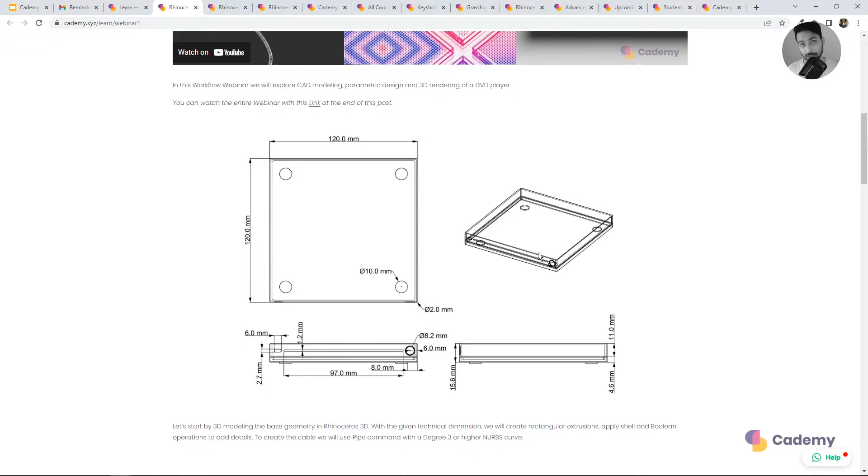You must have seen the posts, that's why you guys are here basically. If you are not aware, we have already done a couple of webinars in the past, so you can go to the resource section. This was the first webinar, so if someone is barely starting with Rhino, you might find this one more useful to start with. The second webinar was a bit more complex geometry. This was the third webinar, for a VR headset. And now we are on the fourth webinar.

The webinars have the common theme of creating a workflow. So you start by modeling your geometry in Rhino, then you will apply textures in Grasshopper, and finally we will export it so that we can render in Keyshot. You can, of course, download the free version of all of these softwares from their respective web pages.

All right, so how will the workflow look like? We will start by 3D modeling the mouse in Rhino. You will also notice that I have prepared the file in such a way that you can follow along the steps, and you will also understand how you can create such a complex shape from complete scratch.

Also keep in mind that it might be a bit more difficult to follow along, so try to skip steps, because I have prepared files or shapes in that particular section that you can try and copy to learn that specific command. So we will start by creating the curves, then we will move to surfaces, then we will add details with the Boolean operation, and finally we will prepare the mouse for texturing in Grasshopper.

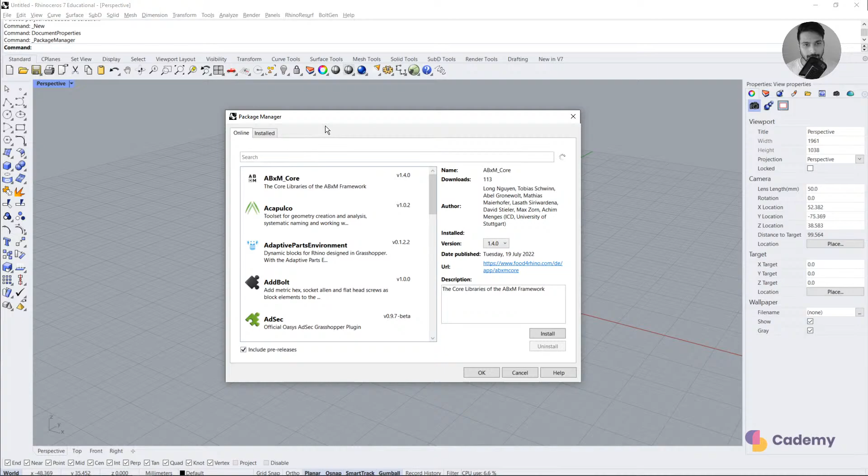In the 4 viewports, the first thing that we will do before we open the file is that we will turn on the package manager. You go to the command bar and write package manager. If it's in Spanish or another language, you can always write underscore and then the command in English, it will work that way as well. Basically the package manager is a new way to install plugins in Rhino and Grasshopper.

In our case, we will be downloading the Lunchbox plugin. So you can look for Lunchbox and you can find that plugin here, just press install and there you go. So you don't have to go to the Food for Rhino page, download the zip file, copy it in the components folder, etc. Not all plugins are here yet, but most common plugins you will find here, so just try to download it through package manager.

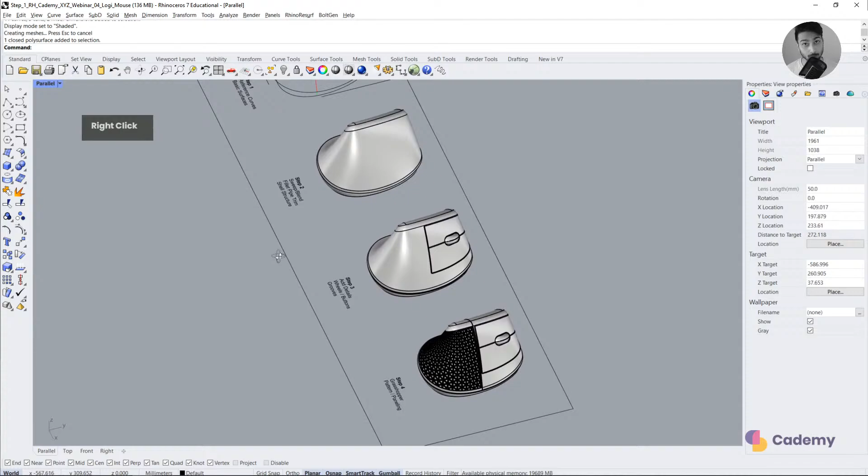First things first, let's change the viewport to shaded. You might notice it's taking a bit longer because I have cleared the mesh cache so it doesn't weigh a lot when downloading the file. So now you can see the first step is creating the curves and basic surfaces. Second step is creating the top part of the mouse. The third is adding details with Boolean operation, and finally texture with Grasshopper.

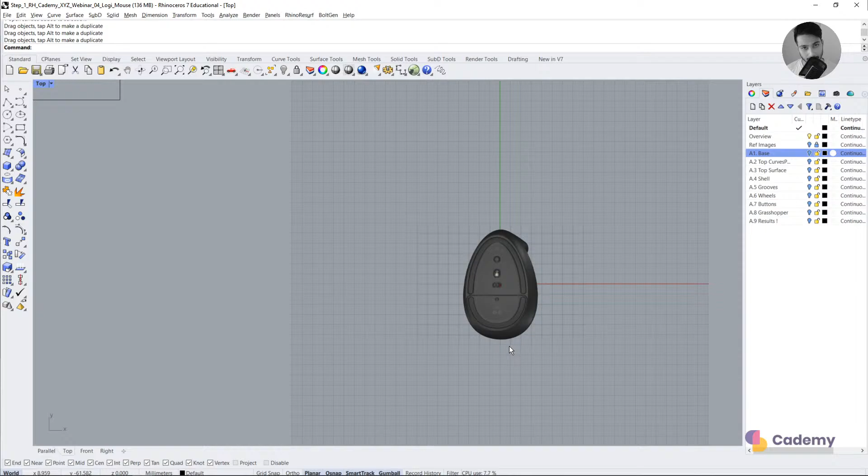It should measure, I think, 108 millimeters. Now you can see the image length of the mouse from top to bottom is 108 millimeters. You would put it in the center, and do the same thing with the rest of the images. Finally, you can also reduce the opacity of the image so you can draw on top of it and still see the curves. You can change it under property object, materials, and change the transparency.

Well, for the webinar, I have already prepared the images. So when you turn on the reference image layer, you can see that I have put all the different viewports that you can use to create the mouse.

So let's start with the first step, the base step. You will notice that you have two parts of the workflow. The top part is the part which I have already finished, and the bottom part is where I would encourage you to follow along the steps that we are seeing. So let's get started.

I'm going to go to the top view, and the first step is basically drawing the outline of the mouse. You can draw the organic shape that you see here using a curve through control points, and the degree of the curve is a degree 3 curve so that we can create a smooth curve. A degree 2 curve is not so smooth, and basically a degree 1 curve is like a polyline.

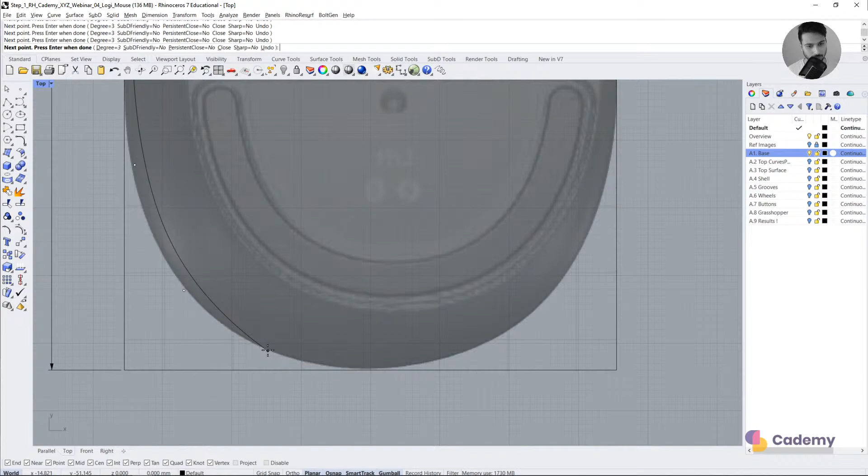So we are going to use a degree 3 curve for this shape. Let's turn it on, set the degree to 3, and then you just copy the shape, the outermost shape. You don't have to be too precise at the moment, because once you draw the points, we can always come back and recalibrate the outline.

So there you go. You can just move these control points manually. When you select the curve and you don't see the control points, you have to turn it on over here, turn on the control point of the object, and then you can move it left and right accordingly.

So once you have drawn the outline of the mouse, I have left it here prepared. The next step is going to be creating the internal curve. For the internal curve, you just use the same curve, basically Control C, Control V, and you scale it.

So you scale it by using the gumball. If you don't see this tool that shows the arrow, you have to turn it on at the bottom of your Rhino viewport, the gumball. So I'm gonna scale it in this axis as well as this axis. Just try to make it as close as possible to this outline. You can see just by scaling it in the two directions, we are able to copy that shape.

So once we have the two curves, now it's time to draw the cut that we have to apply on this shape. Let's go to the front viewport around here, and I'm going to draw this diagonal cut. Let's turn on the curve through control points and try to mimic the shape of this cut.

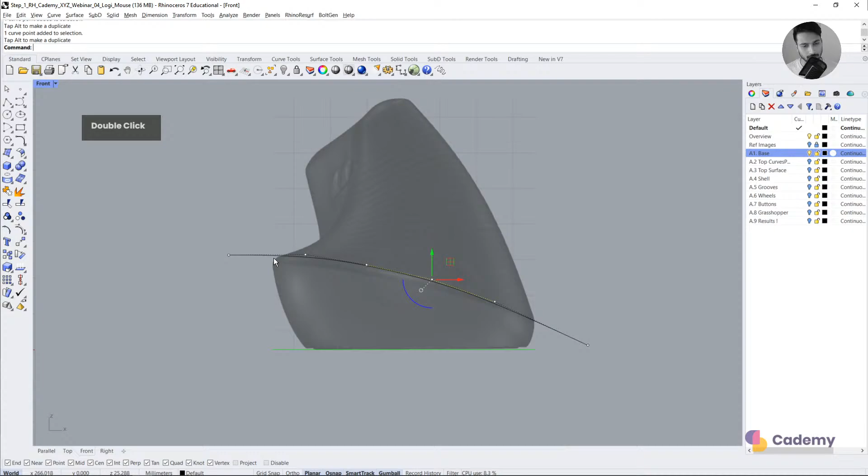You can of course turn on the control point. You can move this control point in order to calibrate properly the shape. So once you have done that, the next step is going to be creating this curve that will define the lateral profile. So in order to do that, once you have created this curve, let's just move it a bit behind, we have to extrude it.

So you can use this curve and you have to extrude it. In order to extrude a curve, you can of course first run the command, which is surface extrude curve straight, and you just extrude it beyond the base curves so that we can project it later on. Or you can also use just the gumball, and using the green handle, when you drag it from the green handle, you are extruding that geometry.

And finally, we don't want this surface that we have extruded to have this much control point, as well as we also want to dip the surface in the front part.

So I will be changing the properties of the surface, and you do that by rebuilding the surface. You select the surface, you run the command rebuild. I have given you the properties to rebuild the surface, so you're gonna rebuild it using degree 3 in U direction. The red arrow is the U direction, and degree 2 in the V direction, which is the green arrow. So you will have 4 control points in this direction, 3 on the other. So you set it to 4 and 3.

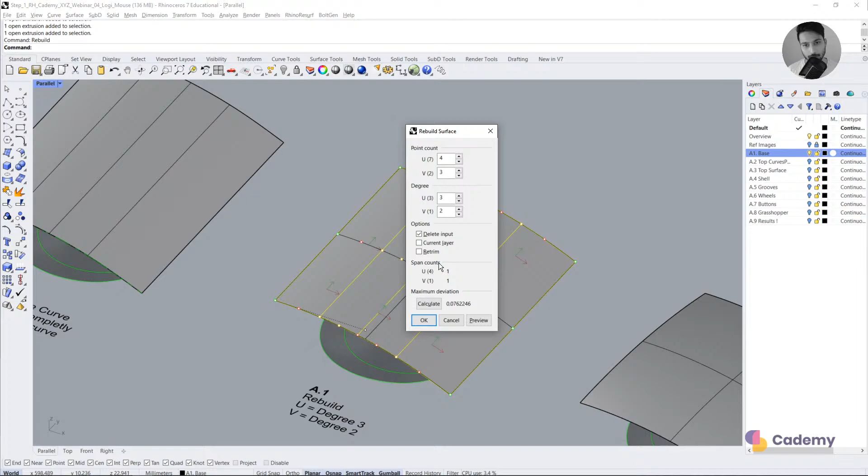These are a bit more complex topics. If you're starting with NURBS modeling, it's basically the smoothness of surface, or the degree complexity of the surface in the two directions. And you have to just add one more point than the degree to have a single span surface, which is like a really smooth surface. But don't worry about it at the moment. Just try to copy this part, the parameters, and press OK.

So you can see now that we have slightly changed the property of the surface. And what we will do is basically move this part down by 15 units.

Okay, -15, and this part by -1. That's what I mentioned here, because if you look at the reference image, that's how much the part dips in the front. If you compare this back part to the front part, we have to move it around 15 units down.

Lastly, we have to project this curve on this surface. So let's run the project command, project curve to the surface, and you should see the curve projected on this curved surface.

Okay, let's see if someone has any question. Can you please explain rebuild a bit more, when to use it, etc.? How can I turn the units next to the mouse on?

Rebuild is basically that once you have created a geometry, you can change its degree and number of control points when you rebuild it. Generally you would use it when you have a really complex shape and you want to smooth it out or simplify it, or when you have a specific dimension curve but have to create a single surface out of it. You would rebuild it with a lot of control points so that you can create a single surface from those many control points, and then apply some texturing techniques to it.

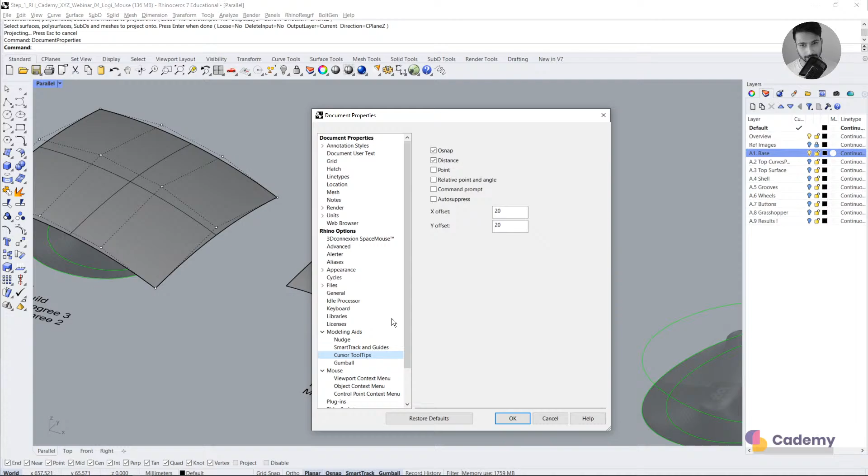How can I turn on the units next to the mouse? You can do that by going to document properties, then mouse... no sorry, modeling aids. It's under modeling aids, cursor tooltip, and turn on the distance option.

Okay, so let me repeat the project command, project the curve to the surface. That's how you will get it. Make sure that the project direction is up, so that it projects up, not front or back.

Finally, once you have the projected curve, that's one use of rebuild. You can see the curve is really complex, so whenever I create a surface from that curve, it will also be that complex. So what I can do is rebuild it using fewer control points, let's say maybe 11 control points. Now this geometry is a lot simpler and smoother compared to the previous surface.

Finally, if you look from the front view, you can see that the control points are either up or down because this was a curved surface. So what we can also do is make sure all the points are aligned in the same plane. You can run the align command and make it fit the average plane. Under modification, align to fit plane - there you go.

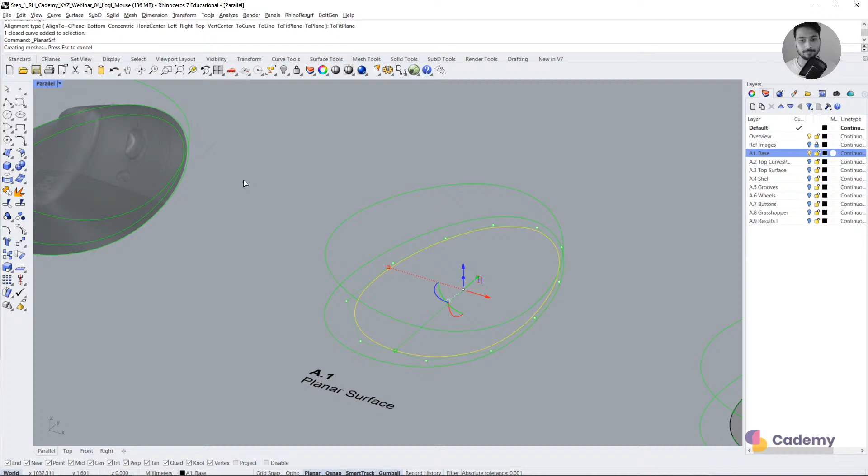Then we're going to extrude this curve upwards so that we can blend these two parts. One last thing we will do before performing the blend - let me show you what will happen if we just blend it right away. It is working, but we need to add some additional profiles to align the cross section.

So let me first generate the profiles and then perform the blend operation. To create the profiles, go to the top view for that geometry and run the bounding box command. It's going to draw a rectangle around that curve, and you can find the intersection and draw a line - here you find the intersection, draw the line for the 4 parts.

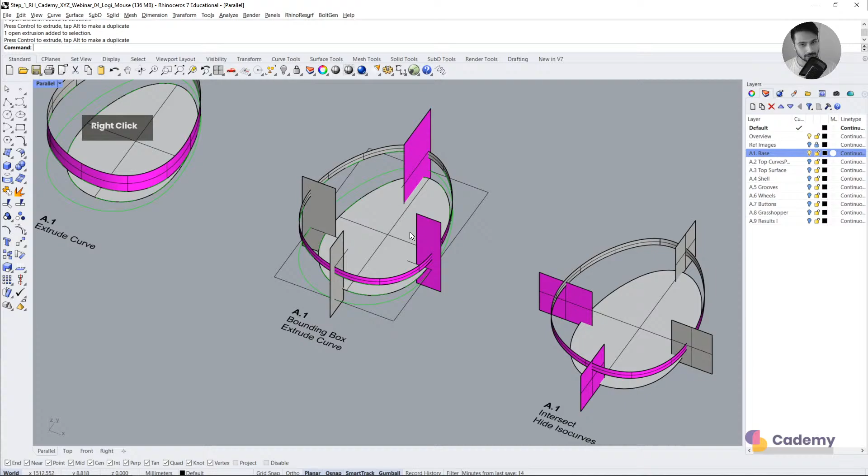Once you have drawn the line, you would extrude it up, making sure that it intersects with all the shapes, like that. You can also move it a bit behind, forward, or outwards in either direction. What we're trying to achieve here is to intersect this with the shape so that we get the specific place where we have to create the cross-sectional profile. So you can come here where I have already prepared it.

Just run the intersect command. Select the geometries that you would like to intersect, and you will notice that it has created these intersection curves, which we can take advantage of when we are performing the blend operation.

We also don't need to see these ISO curves. A lot of you probably model in SolidWorks or Fusion, so these programs have their ISO curves hidden by default. You can do that in Rhino too: select the objects, go to object properties, and hide the ISO curves. Now you don't see those additional curves within the surface.

Finally, let's perform the blend between these two edges. Run the blend surface command, where you will blend this edge with this other edge. We need to align first the seam where the surface will close on itself, so I'm going to use this cross section. Let's press OK.

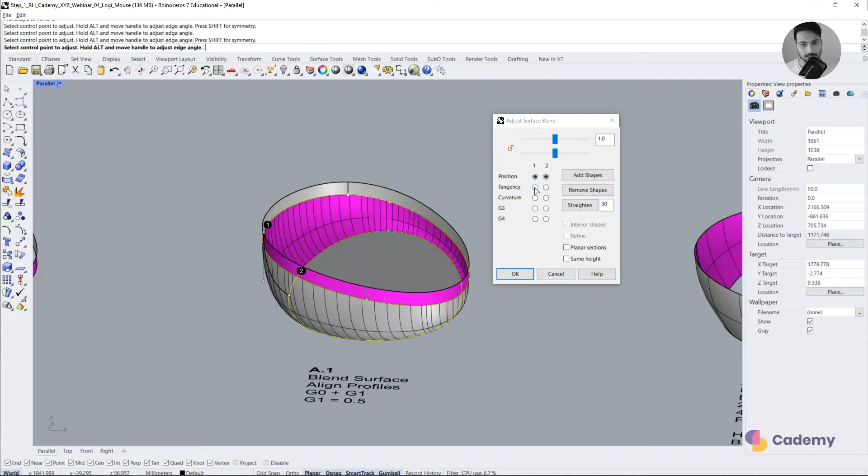This command asks you to define different continuity criteria, as well as control the extension of that continuity. If you set this to 1, it's basically like a simple loft. If you set it to tangency, you can see it's following tangency on this part, and continuous, positionally continuous, or G0 continuous on the other end. So it's G0, G1, G2, G3, G4 - these are different continuity criteria.

You can choose which edge has which of these continuity criteria. In this case, we need G0 for 2. We don't need any kind of continuity except positional for the bottom part, and for the top part we are good with G1. The only thing I'll change here is the extension - it's going to be 0.5. You can define it like that.

Finally, you will add shapes, because you can see these internal ISO curves are not aligned to our profiles. Let me add new shapes - again, you can do that by drawing a line going from here till there. You can see it helped align the cross-sectional profile. Same goes for this part to that part, and finally from this part to that part.

And there you have the bottom surface. You can always hide the ISO curves if you want. Finally, you can also rebuild it using less number of control points to simplify the surface.

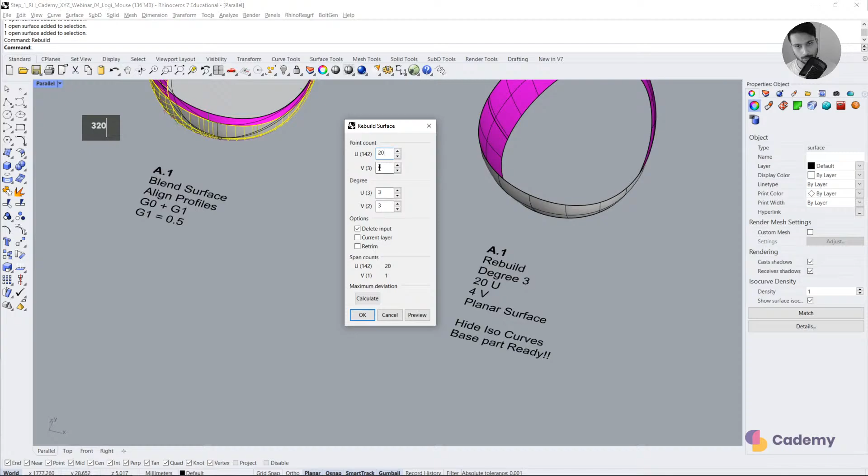So I have given you the criteria to rebuild it here: degree 3, rebuilt using 20 control points in U and 4 control points in V. You can see this is now a simpler surface compared to the previous one. This was previous, this is after the rebuild. You will always try to work with simpler surfaces.

So that's basically the first shape. Any question?

What's the difference between just blend and then the intersect step? If you just do normal blend, both commands will work exactly the same, but if you have created the intersection, you will add additional shapes that can help align the ISO curves. If you don't do the intersection, you don't have that reference so you can align it properly. That is why we had to align first the intersection and then perform the blend.

So let's go to the next step. I'm going to try to go a bit faster now. The next step is basically creating the top part - the top part of the mouse is made like this.

You create a curve, pipe it around 10 units of radius, and then intersect it with a plane. If you intersect this, you get that curve for the top part. That's basically what we have to do.

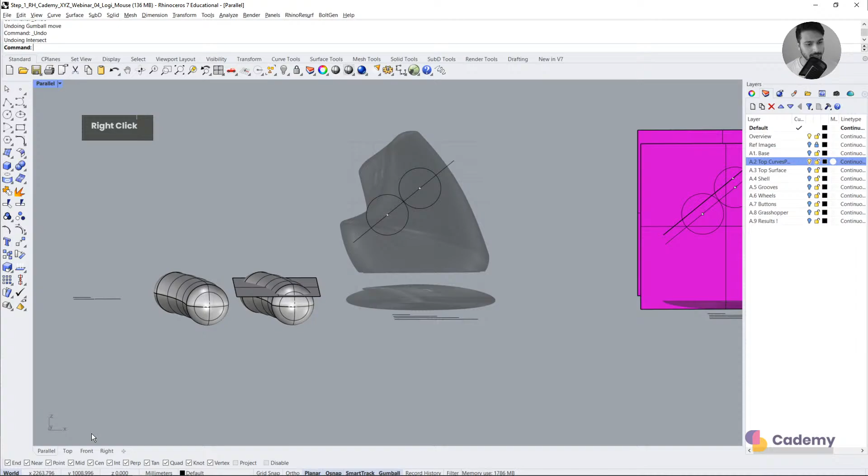In this case, you can see that I have basically drawn two curves approximating the front and the back part, thinking of it as a cross section of the pipe. So the radius is 10 units, and I have connected the centers of these two shapes, or these two circles. You can try to do it on your own - you can create a circle with a radius of 10 units.

Once you do that, you will project these geometries to these two planes. Why? Because if you look from the top view, you can see that is where the cross section or the circular part of the pipe starts on both sides. So I can just extend it, and then I will project these shapes from the front view to these two planes.

Like that. Finally, you can create a loft between these two curves and connect a line between point 1 and point 2. This is going to help you define the angle in which you have to draw the pipe.

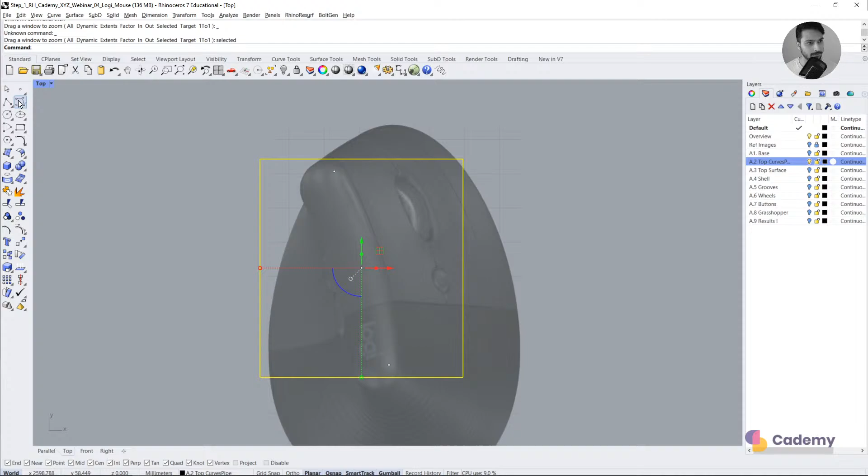So the next step is basically going to the top view and trying to follow the shape. Let's try to follow the shape more or less like this. I think it's better to draw it on the floor, like that. You can extend it later on.

And finally, you will project the curve on the shape. Keep in mind that when you're calibrating something, you can project it with this option called record history. So this is like a really small parametric option that you have in Rhino.

And lastly, you would create a copy of that plane and move it up by 7.5 units. I've done the calculations earlier, so that's why you're just moving it in that way. Finally, you'll pipe the curve. Make sure that when you pipe it, the cap is set to round, so the starting and end of the pipe has a round cap.

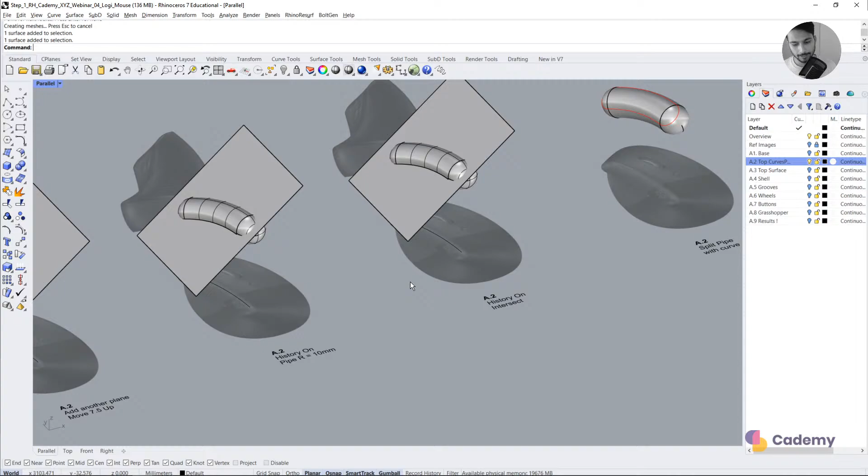When you rebuild the surface, how do you ensure that it doesn't break continuity with other surfaces? You cannot. You have to match it again. So you cannot guarantee it. Of course, you can add a lot of control points, more than the neighboring surface — that way you assure it. But apart from that, you have to match it one more time.

And lastly, we are going to intersect this tube and the plane to get that profile. That's basically the profile we have here. Finally, you can split the tube with this profile, get rid of the bottom part, and there you go. So we have modeled the top part of the mouse.

Now the next step is creating the profiles for the surface generation. The easiest way is extending this plane so it intersects with the bottom part, and you can do that by finding the radius. There's this option called mark radius, so let's click that, and you can see it creates this circle.

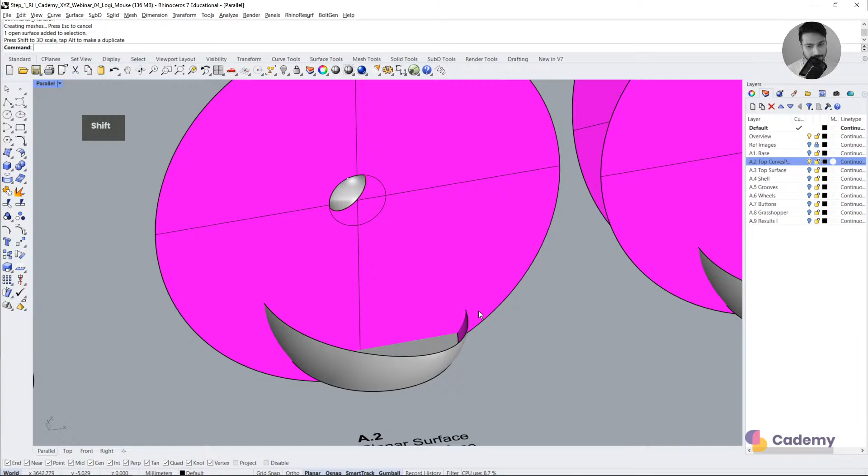That circle is a planar circle, and you can convert it into a surface. With the shift key, you can extend it as much as needed so it intersects with the base surface. In that way we can create a curve that is on this plane, making it a lot easier to create the surface later. I'll do that for the front and back part, and finally intersect them — intersect this and this. You can see we have these intersection curves.

Lastly we have to create the profile. You can do it two ways. One is using the blend option — let me go to the shaded view. You run the blend curve, not blend surface, where you blend this green curve to that curve, and you define the continuity criteria. In 1 we want position, and in 2 we want tangency, and you can drag this down to match the curvature of the surface. That's one way.

Another way is to draw a line between this point and that point — it's a bit easier in perspective mode — and rebuild it using 4 control points in this case, then move these points to match the outline of the mouse. So these are the two different ways to generate the curves.

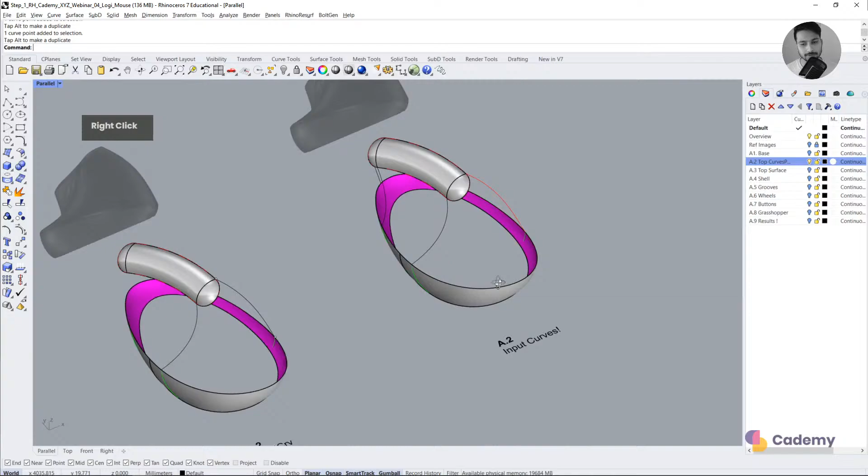Once you have these curves, we can now generate the surface. Let's turn on this next layer and go to this part.

How do you know you break the continuity with rebuild? Let me show you, since some of you have the same question. When you rebuild a surface, you cannot guarantee that it's going to maintain the continuity. For example here, if I rebuild it with, say, 16 control points, you can see that I've broken the history or continuity between these two objects. So you cannot guarantee it. What you will do instead is recreate the boundary — make a planar surface, and I'll recreate it. You cannot ensure that it's going to be continuous.

Another thing that you can do is try to match surface, matching this edge with this edge. You can define whether you want to match it with position, continuity, tangency, or curvature. You can also refine the match so that it matches perfectly within the tolerance of your file. So those are only two options.

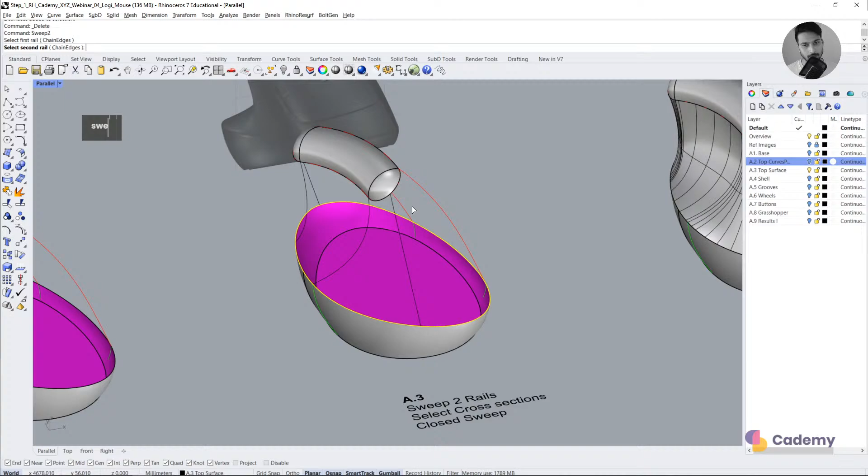Anyways, let's continue. So for this part, let's generate this surface using sweep 2 rails. Rail 1 is our edge at the bottom, Rail 2 is the red curve, and then you can select the cross-sectional profiles.

Basically you can see we are generating the surface. Make sure that you turn on the closed sweep option so that it closes the sweep, and press OK. That's how you will generate the surface.

You can go to rendered viewport if you want to see it under HDRI. And you can also hide the ISO curve if you want.

So the next step is going to be rebuilding the surface. Again, we are going to rebuild it. It's going to go away from the original edge, so I will show you how you can resolve that problem.

But the reason for rebuilding it is, see this surface, it's really complicated. It's not smooth. Also, if you run commands like analysis surface curvature analysis, you can see there are so many artifacts on this surface. So what you will do is rebuild it.

With as few number of control points as possible without losing the shape of the surface. In this case, you can change the degree to 5 to have an even smoother surface, and change this one to 36. Okay, so that is basically here.

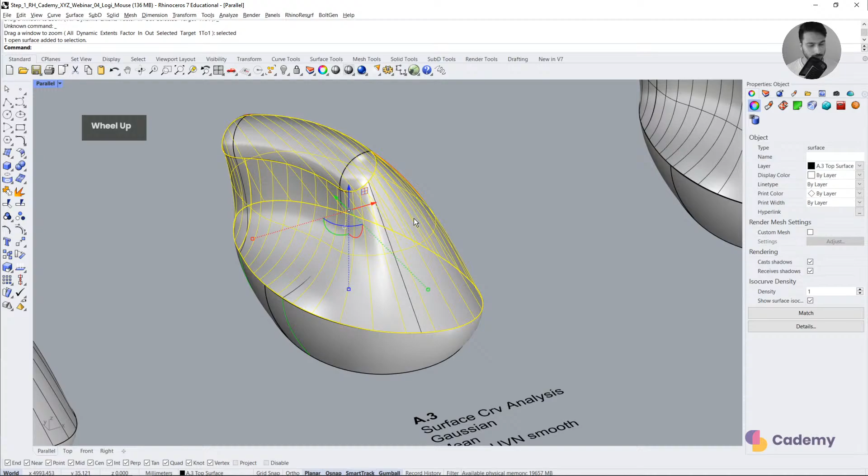And lastly, you can also analyze the surface. Generally the Gaussian analysis is basically showing when the surface either folds inwards or outwards.

You can resolve that by turning on the control points, and you can manually move these points to kind of relax the surface, but you're moving the points in the coordinate of Rhino. However, there is a special tool called Move UVN, which can help you move a point on the UV or normal direction.

You can also smooth it out by the smoothing option. You can select the point and you can smooth out that point. So this can slowly help you create a simpler and cleaner surface.

All right, you can do that for the other parts, and finally you will end up with something that looks like this. And of course, the edges don't match. I cannot just magically join them because when I rebuild it, the edges are not coincident anymore.

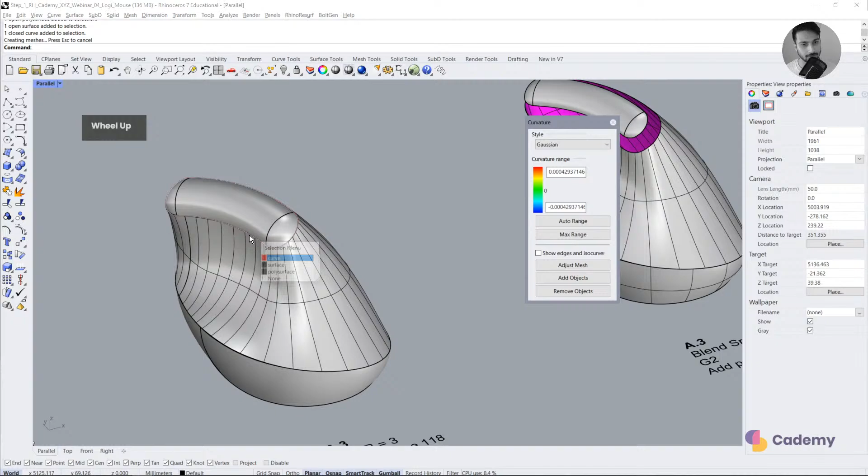So what you do when you have to join these two parts together, well, you create a buffer area between these two parts. And you can do that by basically taking the curve. Okay, here you can see how I have done it.

You basically take the curve and you rebuild it, like every time, with a lot of control points. And then you pipe it. So the surface that it generates is a lot smoother.

So you can see I have already created the curve here. You can pipe it, or you can first pipe it and you can also rebuild the pipe if you want. Both will work. So once you have created the pipe and rebuilt it, you would just trim these two surfaces with the pipe.

So that you can get rid of some part from the top part and some from the bottom.

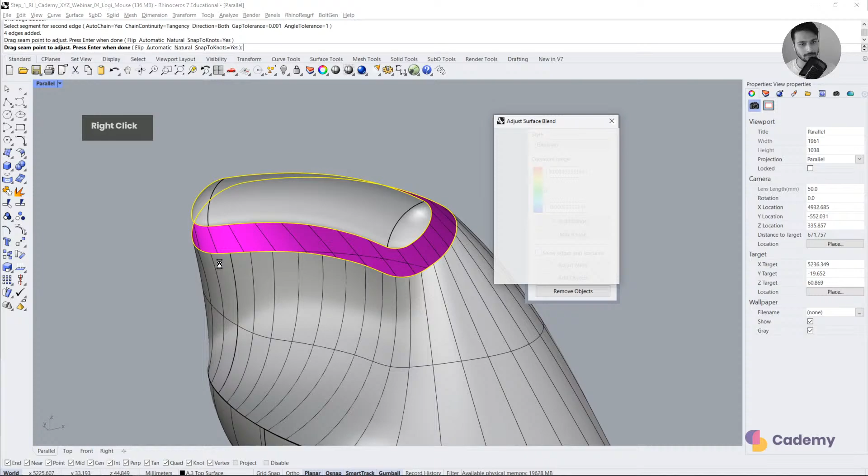Right, so once you have done that, you can now blend these two surfaces, just like the previous example. Select the edges, define the continuity criteria. In this case, you can define curvature, and you can keep on adding more cross sections.

Right, so I'm helping Rhino understand how it should create the blend.

So finally you will end up with this, and you can join it with the rest of the shape. You will also notice that it doesn't leave any naked edge on the top part, of course.

And you would do the same for the bottom part. So as you can see here, I have the curve. If you want, you can rebuild it.

You would pipe it just like last time. Rebuild the pipe if you want an even better effect. And then you would split these two shapes with the pipe.

Delete this part and you blend these two surfaces. Chain edges. In this case, G1 is more than enough, and if you want, you can help Rhino with the cross-sectional profiles.

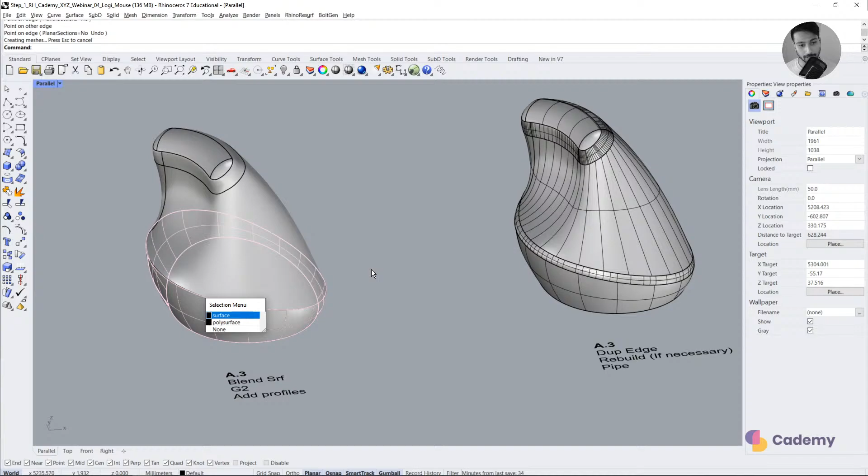Once you have done that, why must the pipe be rebuilt? When you are creating the pipe after duplicating the edge, you will see that the pipe has some complex shapes. If you turn on the control points, you can see it here. But if I rebuild it one more time, it's going to try to relax those sharp corners. And finally, you would have the final geometry. You can hide the iso curves, and there we have the final shape.

Now it's time to add the details. So let me hide this and turn on the fourth layer. To smoothen out the surface of the pipe, you rebuild it. A lot of times you will see that the screen is a bit lagging behind, and that is because I have cleared the mesh cache I told you earlier, so it's recalculating every time I'm trying to see it. It might take a bit of time for you as well.

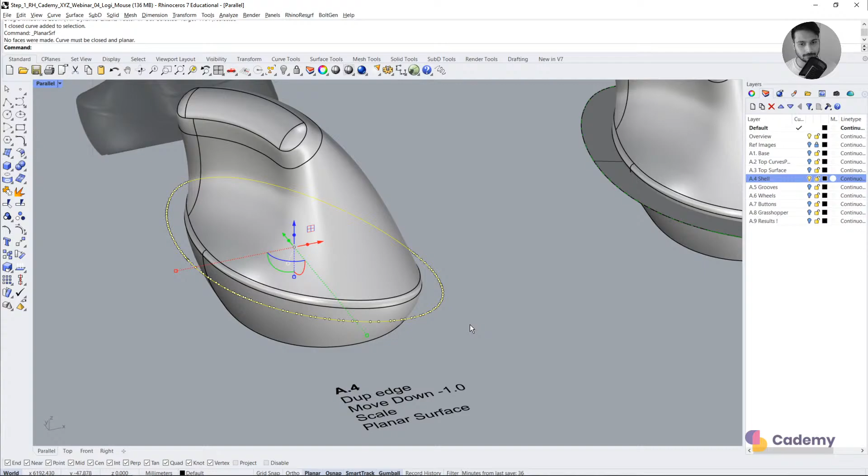The next step is basically hollowing the structure. The easiest way to do it is just duplicate the edge. You scale it, and move it down by 1 unit. Convert it into surface. If it doesn't create a surface, you can always follow the same technique where you select the control points, align to fit plane. This will do a really minor modification to put everything in the same plane.

Once you do that, you can then create a surface. I have the surface here, and then you can do Boolean split. So you end up with two different solids. And finally, once you have those two shapes separated, you can then hollow the solid shape.

So for hollowing, you will use the shell command. Which face would you like to remove? Let's say this face. And you define the thickness, let's say 2 millimeters of wall. Press OK, and you can see that it has created another solid with a 2 millimeter thick wall and then empty space.

In this example, I have tested it. Shelling up to 1 millimeter works. This command will not always work, so for 1 millimeter you can see it works. It's going to take a bit longer for the top part.

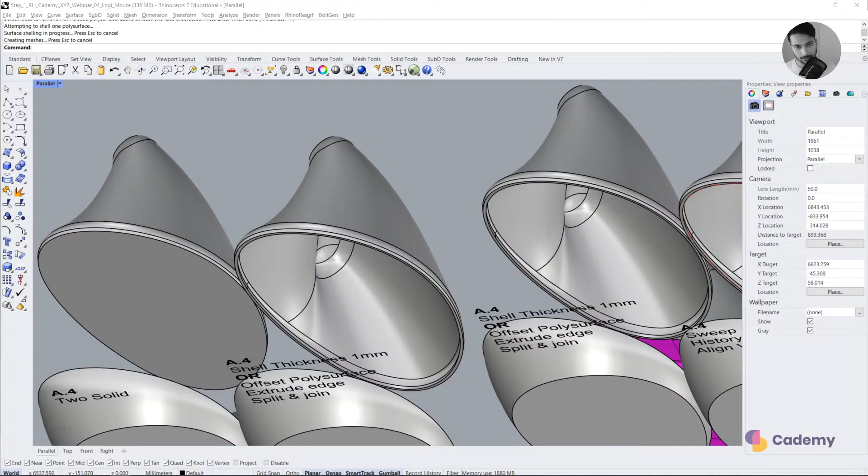What if you wanted to keep the sharp edges? The pipe blend surface seems to work best when you want a smooth transition. In the other case, you would probably rebuild with a higher number of control points and match the surfaces using the match surface command. As you can see, once we shell the geometry, you can end up with two solid poly surfaces.

I have also given you another way of creating it. Imagine if your thickness is higher than 2 millimeters. In that case, it's not going to be easy to shell the shape. So for that, you would basically explode the geometry and join the rest back.

Let me move it a bit below. Then you will offset the surface, both sides, give a bit more tolerance, solid no, rounded corners, and distance, let's say 2 millimeters. So it's going to create an internal offset, of course not creating a solid. Let me flip it so that you can see it easily. Flip the surface, and of course you can see there are some artifacts.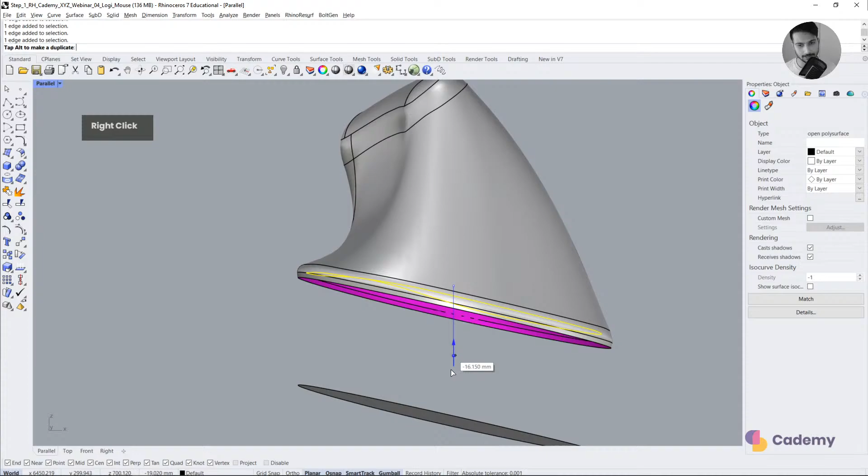You need to get rid of them, just delete them like that. Once you have this part cleaned up, you can just select the edge with Control Shift click, and you can drag it down to extrude it. Let me join it back. I can move it up by 25 units.

So I need to trim this plane with this, and this with this plane, both together. So trim this with this. You can see I'm able to get rid of this part, and then trim this with the internal plane. Basically we join them together and we end up with a solid shape.

That's when the shelling command doesn't work. The next step is generating the profile for closing the mechanism. You can go to the front view, go to the wireframe viewport, and then you just draw a profile. You can use a command like rectangle around this curve.

Again, you can draw a rectangle of whatever size you want. You can move it in. In this case, I'm gonna make sure that it's within the geometry so that later on it's easy to sweep and remove the excess part. So you can see here I have left you the profile. You just go and run the sweep with one rail. This is the rail, this is the cross section. Press OK, press OK.

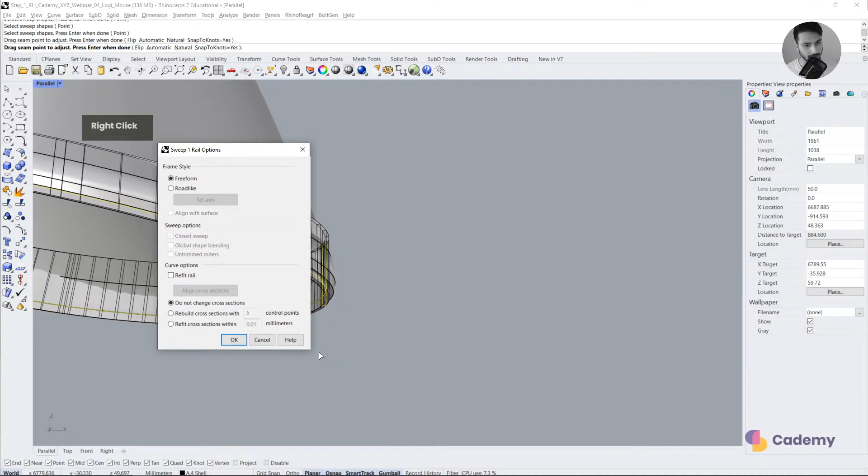You will notice that the profile is inclining as the cross section revolves around the profile, but you can force the profile to maintain a specific orientation. So you convert it into a Roadlike sweep, and the axis in which it has to orient itself is the z-axis. Now you can see this was before, this is after. It has oriented perpendicular to the z-axis.

You would repeat the same for the bottom part, and you will end up with these two sweeps. Let me change the color so you can see it in a different viewport. Split this, or I can just do a Boolean difference, this with this. You can delete this part as well as that part. This is the lid part that is left, which you can join together with a Boolean operation as a single solid. You would do the same for the bottom part, but here you have to remove the material. You can also leave a bit of tolerance.

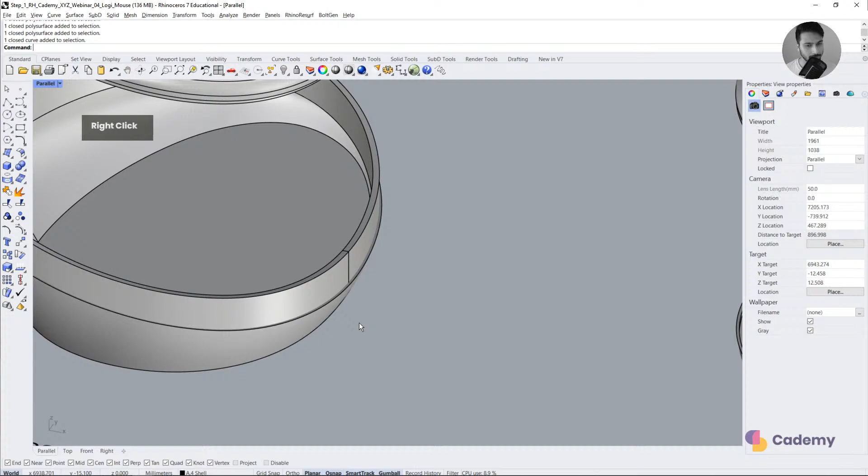If you check this profile, I have extended it a bit beyond that so that it eats up a bit more material for the tolerance. Remove it with this. So you can see here that we have the lid part. Okay, and finally that's basically our final shape.

We are left with just two more things quickly: how to add the grooves. It's gonna take a bit longer.

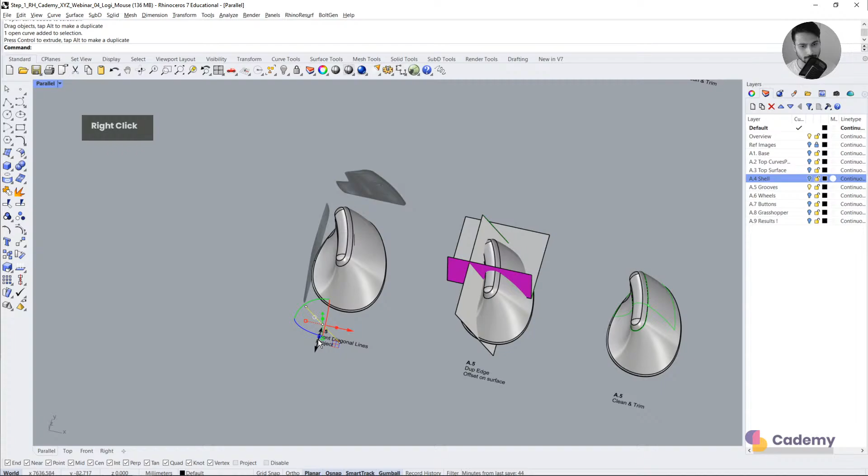In order to create the grooves, let's get close to that part. Okay, you just draw these lines. So you can probably start by drawing a straight line and then rotating it to a specific degree. Here I'm just going to create a line that closely resembles this part, so that I can intersect it with the geometry later on. I will do a similar thing but for the side view.

It's going to be a bit difficult to visualize the side view because we have a lot of geometries in between, but let me show you how it will look by moving it up in the right view. Here I need to generate this shape, so I'll create a line that passes through that part around here, and another line that passes through that part around here.

When you generally draw in Rhino, the curves will be all the way in 0,0,0 of Rhino, so be careful with that. Now you can see I can also extend this and create an intersection between the mouse and the geometry. So you can copy this part, and you can intersect the mouse plane with the other plane, and you will see that it has given us all the intersections that we will need to create the grooves. Let me delete the planes.

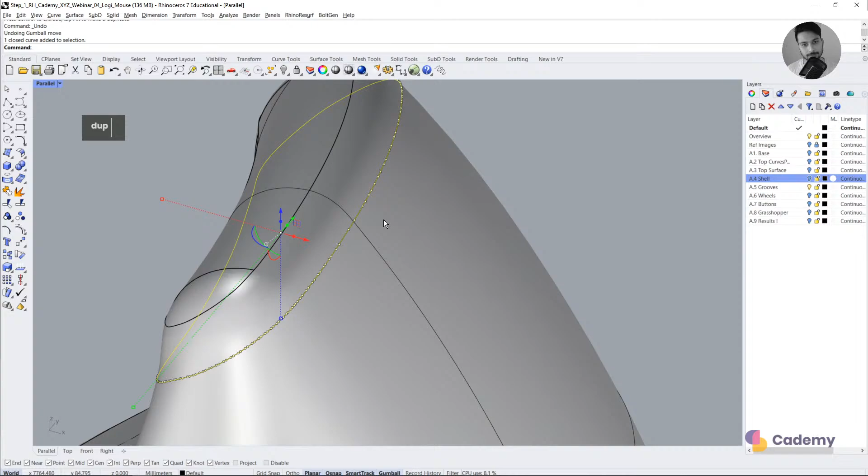Apart from that, we also need to create a groove just below this blend. So in order to create a curve here, you can first duplicate the edge to get a curve exactly on the edge. After that, there is a really interesting tool that lets you offset a curve but on top of a surface. Go to Curve, Offset, Offset on Surface. Select the surface, and you can see that the curve will now be offset on top of the surface automatically. So the curve exists on top of the surface.

How did you extrude with gumball? In Rhino, when you have Rhino 6 or 7, you will see this circular handle. When you drag it from that circular handle, you can extrude it. So a point can be extruded into a curve, a curve can be extruded into a surface, and a surface can be extruded into a poly surface.

And lastly, you have to just clean and trim. So select everything, get rid of this part, on the other side this part, and this part. Rest all we can just delete. So select everything except this, and you can delete it. Right, so there we go. We have now this path where we can then pipe and create the grooves.

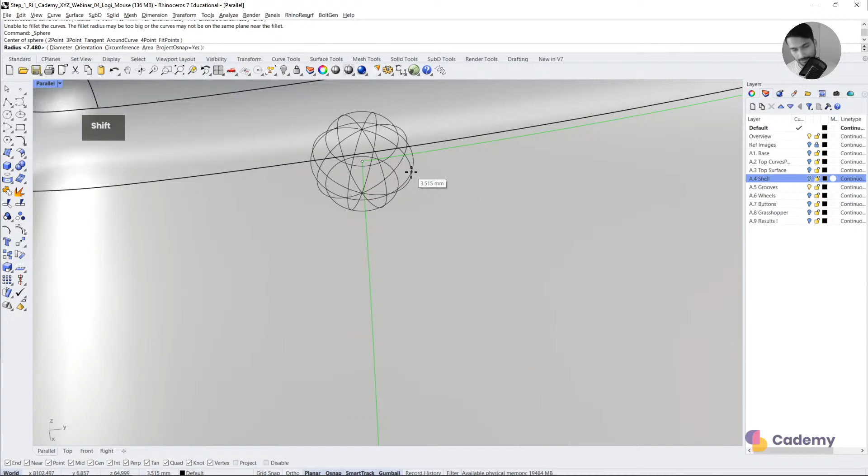Lastly, we will also add a fillet. You will see that I cannot just add a fillet on this non-planar curve. So the easiest way to do that is by creating a sphere of the radius you want, let's say a radius of 2, and you can intersect the sphere with the curves. It's going to give you these points, and you can use the points to split the curves into small parts. Get rid of that, and now we can just blend it using Blend Curve.

Okay, G1 continuity, and there you have a fillet on the corner of exactly that dimension. Of course, once you do the fillet, you will have to pull the curve back to the surface. You will run the pull command to pull the curve back to the surface, because when you do the blend, it might not exactly be on top of the surface.

And lastly, we are going to create the diagonal. So let's create a line that passes through the center, extrude it and intersect this and this. And you can again split this curve using this curve, so you can get rid of the extra parts.

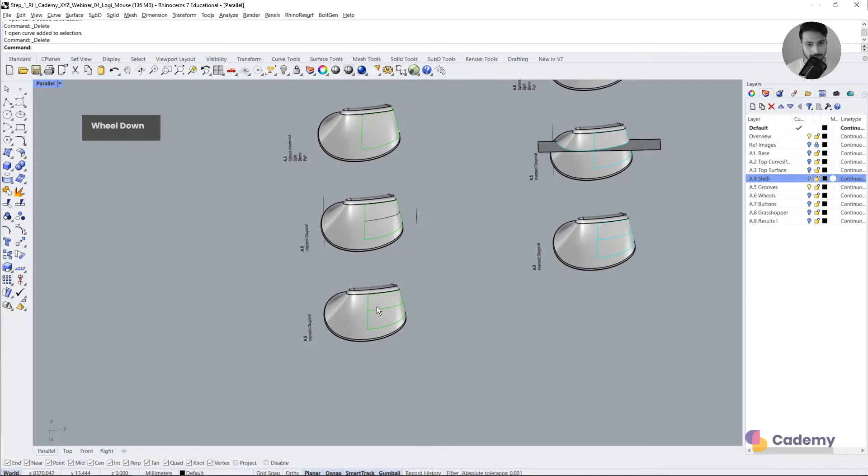Perfect, so finally that's what we have at the end. Let's turn on the wheel layer, and we will perform the pipe and Boolean difference in the next step.

So for the wheel, you basically take the same diagonal profile and you move it here. The wheel is approximately a cylinder of 12 millimeters radius, and you can apply a fillet of 4 millimeters to the corners.

Okay, then what we will do is align this object on this plane, or orient it. So you run the orient command, select the object from here to here, orients from here to there. And the only thing we need to do is use the reference image to position it around that part.

Okay, so now we know where the wheel should be. One thing I didn't mention before, all the objects are separated by 150 units. So when you move it 150 units, you will see it exactly goes to that specific part.

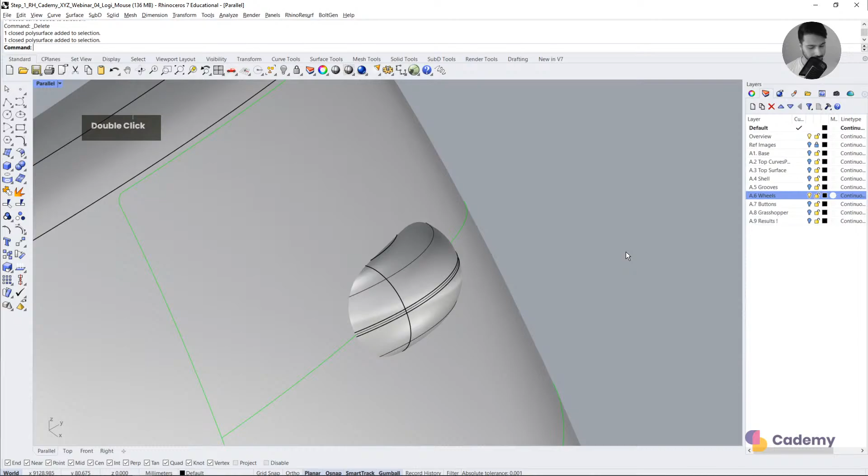Alright, so the last thing is basically creating an intersection between the wheel and the surface. So you get that profile, change the color, and if you want to create an offset, just like last time, curve offset on surface, and you change the height to be, let's say, 2 units.

Sorry, curve offset on surface, not normal to surface. Flip and define the distance. Right, so that's basically how you can get the additional part so that you can split it out, and then you can convert it into solid. Surface, offset surface, solid yes, give it the thickness, both side yes, and there you go.

So now you can use this for Boolean difference, and that's how you will end up with this geometry. Lastly, you will also be creating a pipe. I'm not sure what was the radius, but maybe around 0.4. And you would do Boolean difference with the pipe.

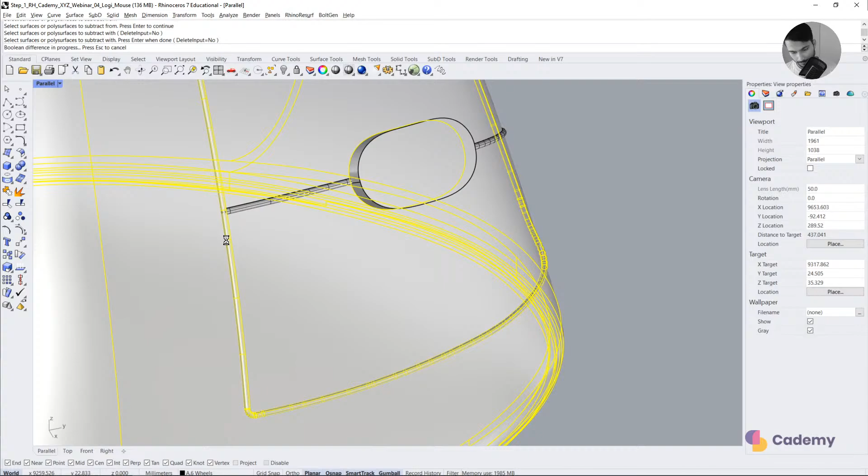When the wheel move part was a bit fast, can you maybe... Okay sure, I can explain it to you one more time. I used the orient command for that.

Yeah, maybe here there's a slight problem with this. You can just pipe it one more time, but without the cap, flat. So maybe it's gonna work better now. I think I haven't created the hole. Yeah, it's not a solid geometry, that's why it's not working, but yeah, in this part it should work.

Pipe. Okay, anyway, so the orientation for this geometry was, let's say if you have any shape here and you want to orient it on this plane, you would run the orient command, object from this corner to that corner goes to this corner to that corner. Okay, so it orients it like that.

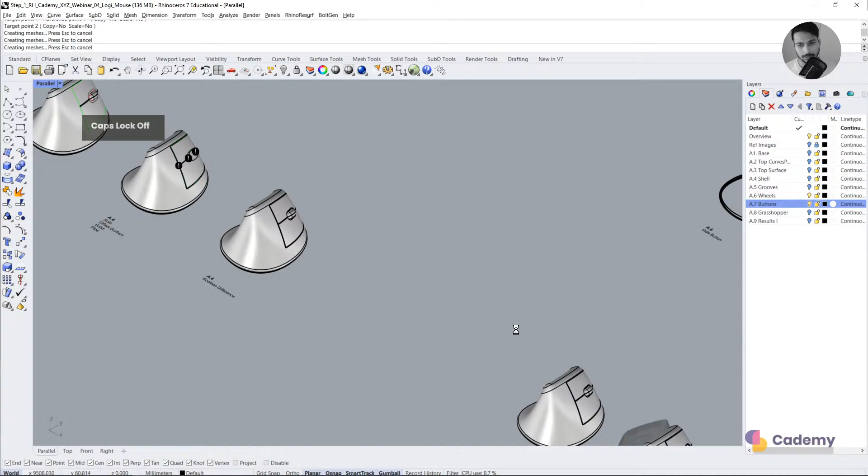Perfect, alright, so once you have the final shapes, let's move on to the buttons part, the other side button. So you would also just draw the curve from the side view, this curve, and you would basically extrude it and intersect it so that you can get this curve that you will use to generate the button.

Okay, so here you can see I have created the button, and finally you will create another curve, pipe it to do Boolean difference to get the button part. Again, of course, here you have to do a pipe. I'm not sure what's the radius, 8 is too much, 4.

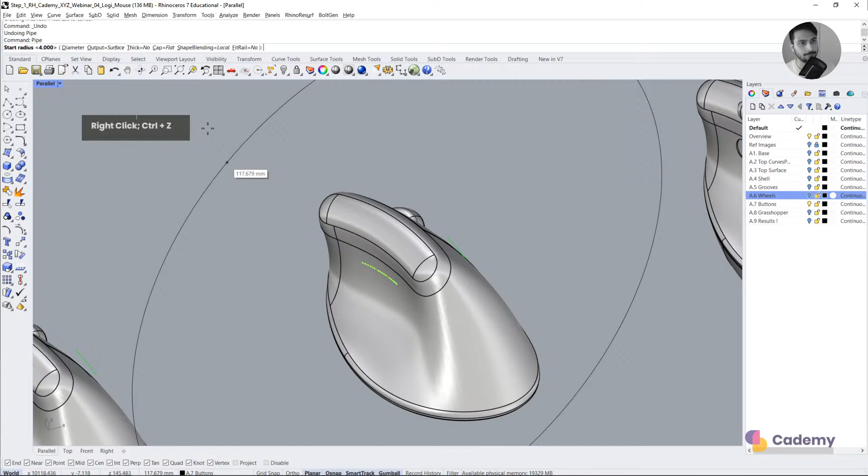Round cap, something like that. Move it inwards, and there you have the button. Just like the wheel part, you will intersect this with the poly surface to get the profile. You will offset the profile, trim the surface, and then do the Boolean difference.

All right, so last we are left with the grasshopper part. What's the time? Yeah, we have half an hour.

So first we have to prepare the geometry for grasshopper. Once you have the geometry, you will basically get rid of everything else except the part where we will apply the texture. You don't need this at the moment. Once you have the part separated, we need to find out where we have to cut this surface so that we can apply the texture. The easiest way is to use the reference image, and we have to trim the surface around here and around there.

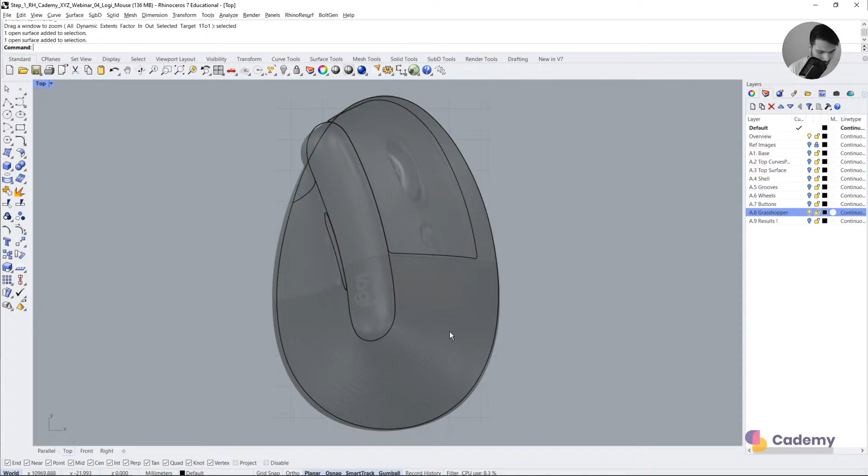So the easiest way to do this is extracting the ISO curve of the surface. Extract ISO curve, select the surface. So the ISO curve is around here, and the other one is around here. If you see that the ISO curves are not in this direction, just try to toggle the direction from U to V. A curve surface has infinite ISO curves, so you are just basically extracting one here and another one over here.

Once you have extracted the ISO curves, we don't need these ones, you will split the surface on the ISO curve. Split surface with this ISO curve, with this one, and be careful, there is also a small part, so select that as well. You will notice that you are now end up with this small chunk of the surface.

Any part that was really confusing to you guys? Because now we have to move to grasshopper. Let me know any questions. The hexagonal textures, unfortunately not. We are going to be working just with the triangular texture at the moment. What if you wanted to keep the sharp edges, pipe blend? Okay, yeah, I think we have responded to that.

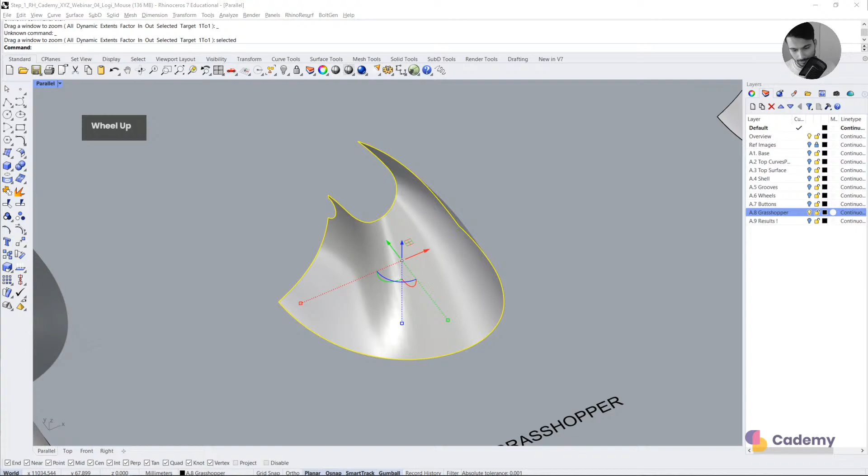All right, so if all good, then let's move to grasshopper. Let's turn on the grasshopper environment by clicking this button. It's gonna pop up this window, which is just the grasshopper window that's gonna float on top of Rhino, and this is where we will be creating the texture for this shape.

If you want, you can also drag and drop the step 2 file in the grasshopper canvas, like that. So the first step is basically importing the surface inside grasshopper. In order to do that, let's double click on the canvas and write surface. So it's going to create this different nodes.

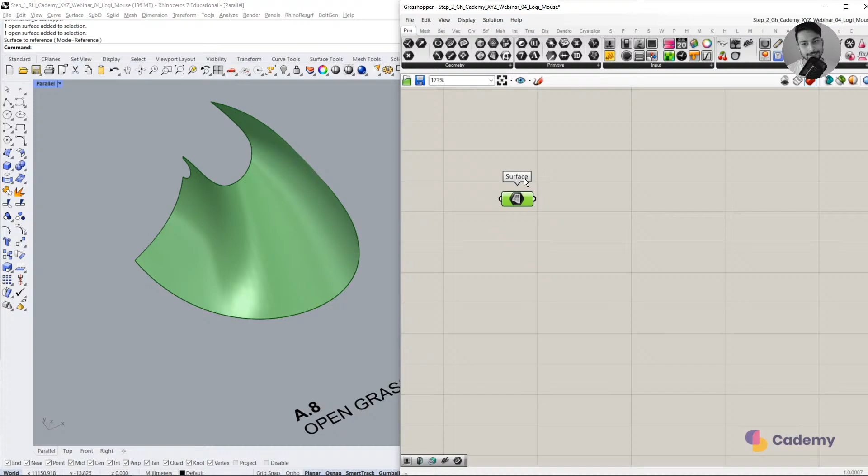The one that we need is this hexagonal node, which is basically a geometry container, in this case a surface container. So in order to reference this surface in Grasshopper, you have to right click, set one surface, and you will notice that Grasshopper window minimizes, and it's asking you to select which surface you would like to reference into Grasshopper. So there you go, we have imported the surface in Grasshopper.

Now if you have installed the plugin correctly, you should be able to see this L tab, which is the Lunchbox tab, and in the Lunchbox tab we will be applying different panels. In this case we are going to be applying triangular panels. Let's create that component.

Connect the surface to the surface input. You drag the cable, you connect it here. If you want to disconnect it, you can right click and disconnect as well. And if you don't want to see a node, you can select the node, press the middle mouse button and hide it.

Okay, so now let me hide the geometry in Rhino as well. Let's go to wireframe, yeah, wireframe is better. So I need to calibrate the number of panels I want in the horizontal and vertical direction. In this case, you can copy these numbers, 60 and 25 - 60 in U and 25 in V. If you want higher density or lower density, you can change it.

All right, so once you have created the triangular panels, you will notice that the panels extend beyond our surface. The reason for that is our original surface is actually that big. What we have done in Rhino is trimmed the surface during different operations, so we only see this part, but the original surface extends all the way around, if you remember from the sweep and rebuild command. Now Lunchbox plugin works in this way - it will always generate the panels on the entire surface.

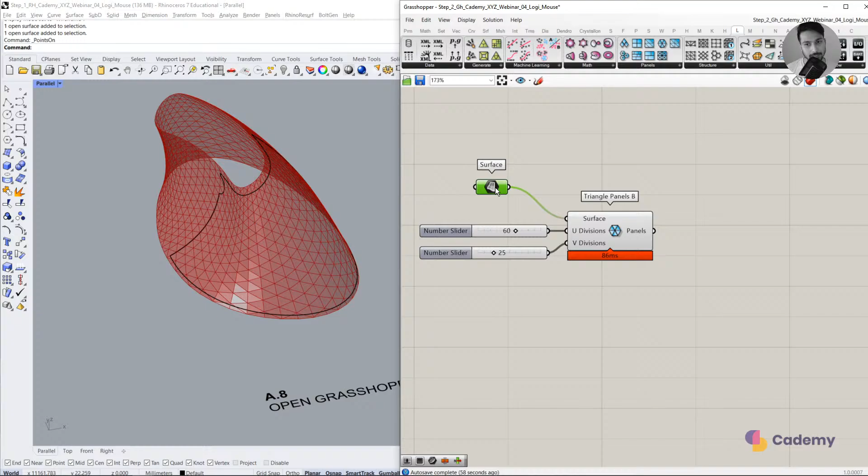Now there is a quick way to get rid of the panels that we don't need, that are beyond the trimmed surface, and it's also going to help put the curves exactly on top of the surface, because at the moment they are not on top of the surface. So the command is called pull curve. It's going to pull the panels to the surface.

Let's connect it. It might take a while, but now you can see that the curves from the panels are now pulled to the surface. You can hide the triangular panel component, and you can see that we have the curves on top of the surface. Okay, any question till this part?

Okay, no worries, let's continue. So the next part is basically cutting the surface on these curves.

In order to cut the surface on these curves in Rhino, you would do something like this: you have the curve, let me create a copy of the surface, and you would do something like split the surface with these curves, and you will end up with these small chunks. So that's what we will do in Grasshopper.

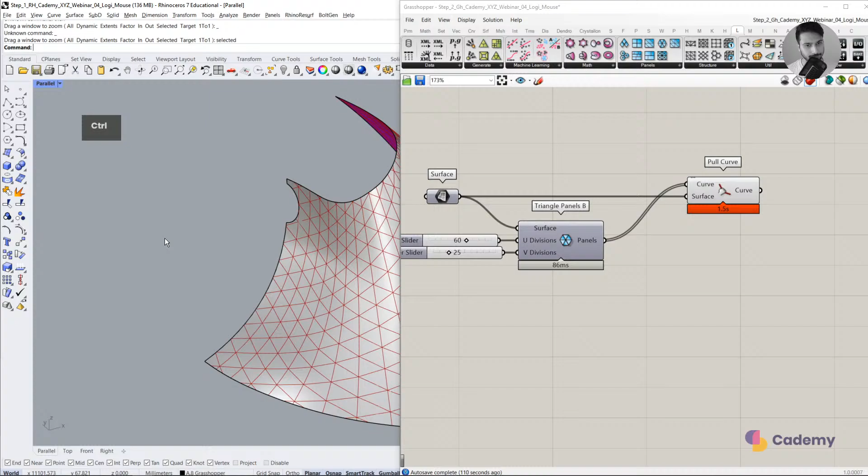Just a moment, let it calculate the mesh. Okay, let's go back here. Let me also extend it till this part so that we can see it properly.

In order to split the surface, you will use the surface split component. You will always be able to see the name of the component as well as the logo, so you can just write the same name and you should be able to find that component. We need to split this original surface on this set of curves.

Okay, seems like it worked. Takes a bit longer because it's a complex operation.

Someone asked, can we align the beginning of the triangles to the beginning of the surface? For the trimmed surface, technically you can do it. What you can do is just move the original seam, the surface seam, somewhere else, and you will be able to control the position. So if I show you by untrimming the original surface, this is where the surface is closing on itself. So I can always run the surface seam command and move it anywhere I want, and that will be the starting of the panels.

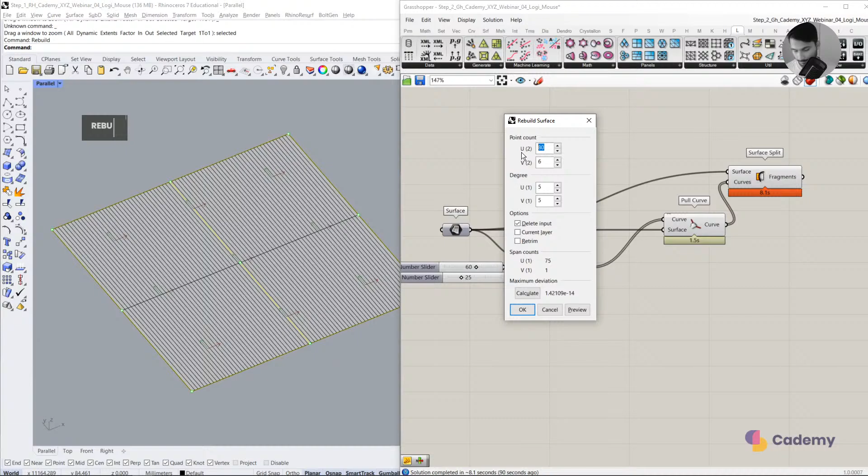And lastly, can you please explain the pull curve tool again? So whenever you create a surface and you want to put a curve on top of it - let's say it's a deformed surface - and let's say you create a curve here and you want the curve to sit on top of the surface, you can pull the curve to the surface.

It's different than project because in this case you cannot project easily. Each curve is facing in a different direction, so you need to find the exact vector in which you have to project. But when you pull it, it just attracts it to the surface.

Can you explain what if the surface was built from a network curve? I don't think there should be any problem. You can still use Lunchbox with that.

So the next step is basically in two parts. The first part is separating all of these small chunks, from all of these trimmed chunks, the ones that are really small.

So what you can do is calculate the area of the surfaces. You will find that the component is red in color - maybe there is some really small part that it's unable to calculate the area for, but it works even then, so you can ignore the error.

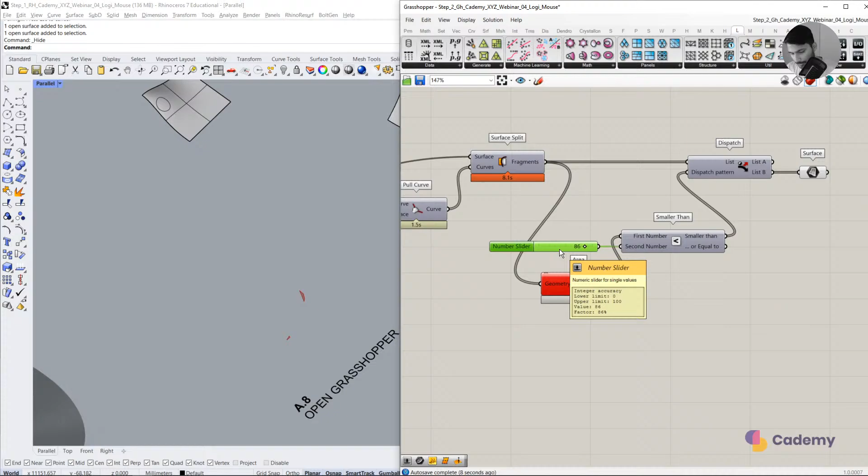Let's hide this, hide these as well. So if I add a surface container here, you can see that these are the small chunks. And if I keep on increasing the number - it's a really big number - as you can see here, we are able to select the smaller chunks like that.

So I will set this to around 2.5 or 3 so that we don't create a panel texture on this part, but the rest we can do. So these are the parts that will be joined to the final texture later on.

Now we have to work with the rest. I can hide this. So for these parts, what I have to do is basically scale it. And you can scale the panels in the same place by using the area center.

Okay, and you can change the factor to make the panels smaller or bigger.

So these are the scaled panels, and these are the original panels.

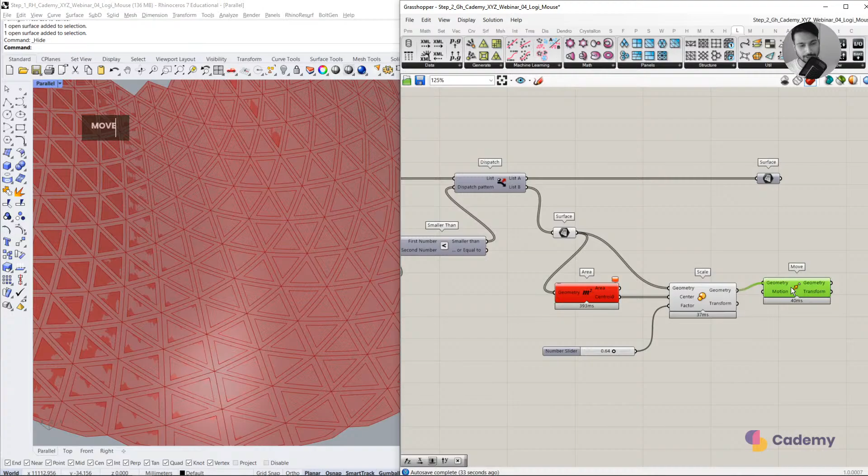Now we need to move these scaled panels away from the surface. In order to move any geometry, you need to provide a vector in Grasshopper - you need to tell how it should move. By default, it's all moving upwards, but you have to move it in the normal direction, so you have to find the normal direction for each panel.

You can do that by using certain components like brep closest point, where you basically pull these centroid points onto these surfaces, and it's going to give you a normal direction, which you can use to move the panels in the normal direction, as you can see here. If you want to control the height, you can just multiply the number by either a positive or a negative value.

Yeah, it sometimes acts weird - Grasshopper maybe isn't understanding it as a vector. It's still working, but it doesn't give you any problem. I'm going to use the amplitude component, which is basically the same.

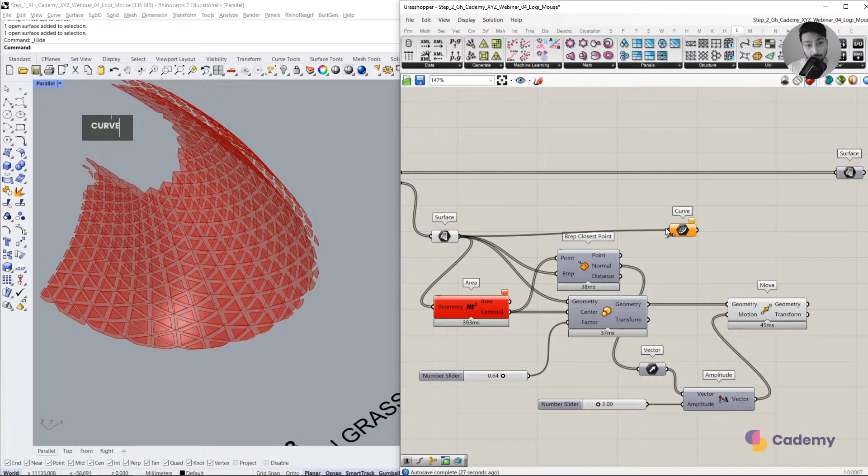So I need to first convert them into curves. You can just add a curve node, and Grasshopper translates the boundary of surfaces into curves, just like that. You would do the same thing with this part.

And we need to loft the base curve and the target curve. In order to do that, you have to know a bit more about data trees. So what we are basically doing here is putting each curve in a separate branch.

In order to do that, we just graft the data tree, and now you can see each curve is a new sublist. You can see that the first curve in the base panel and the first curve in the target panel have the same address, which means when I fuse them together, they will create a single list with two curves inside.

So now when I loft them together, it should work perfectly... it doesn't work perfectly. Let's see why - height is too much.

Nope, sometimes the data conversion doesn't work really well. Let's see - if I convert it into curve directly... neither.

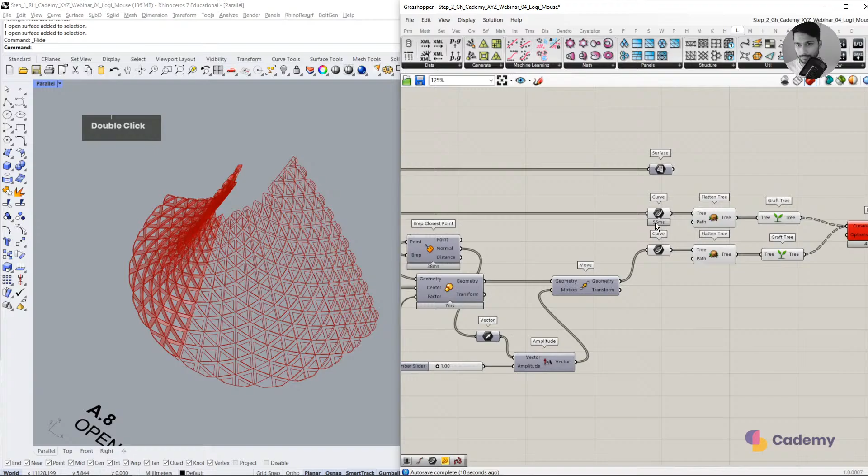Let's see if I convert it into curve after that. Still some problems. Yeah, I think the problem could be the way we are dividing the surface.

In case it doesn't work, no worries - I have actually created a similar script at the bottom. Yeah, probably it has to do with one of these small parts. In this case, let me just grab this part.

All right, so that's the base surface - pull, split. Yeah, now I see - I'm using it twice, but anyways, we can continue from here.

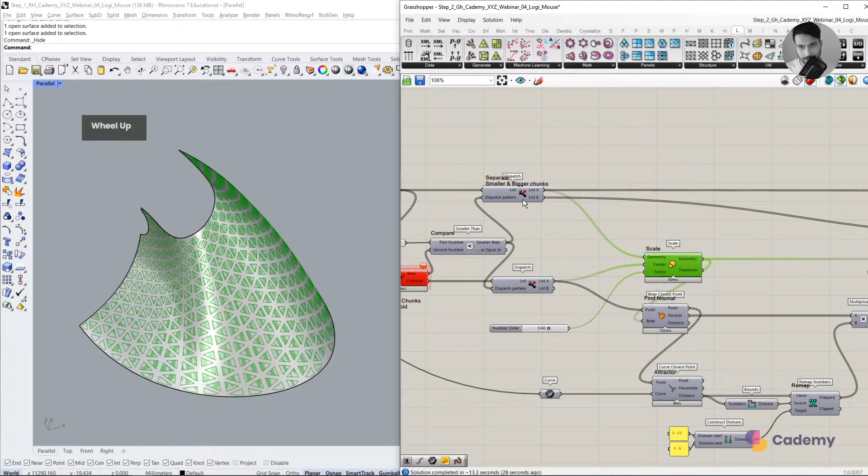So here you can see it's basically the same workflow, and in this case I'm also adding an attractor, which will control how much the curve extrudes outwards as it gets away from the boundary. Finally, you will end up with a single poly surface.

If you want, you can check the file properly. Let's bake the result to convert it into a Rhino geometry and move it 150 units.

How would you do draft analysis? In this particular example, we are not worried about that because we are going to be 3D printing it. But if you have to analyze the manufacturability of this, you would run the draft angle analysis.

In this case, it's found here - draft angle. Let me set the direction, this way, by curve.

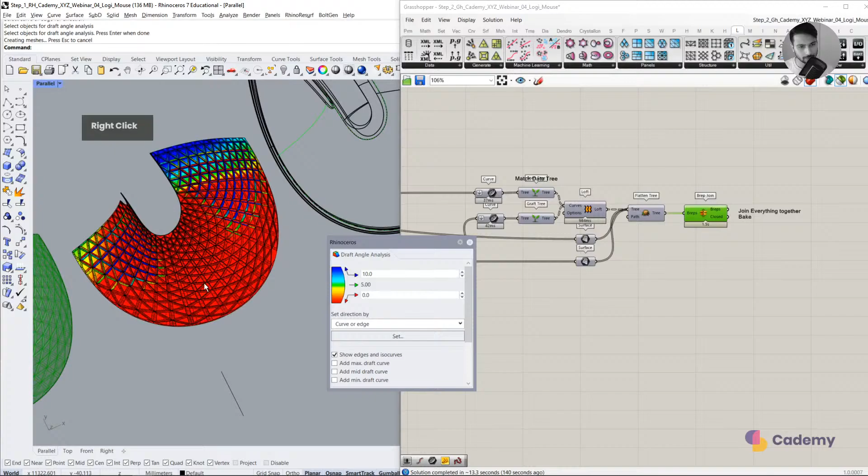Add object. So first you can see here where you might have issues with the draft angle - here is a way to evaluate. Maybe you have to do it in two or three separate parts for this mold, for this particular texture.

Someone asked, is the attractor point the center of the referenced surface? Yes, the center of the reference surface. You attract the points to the curve and then remap it so that you can move the patches of surface away in a controlled way. And the final result looks something like this.

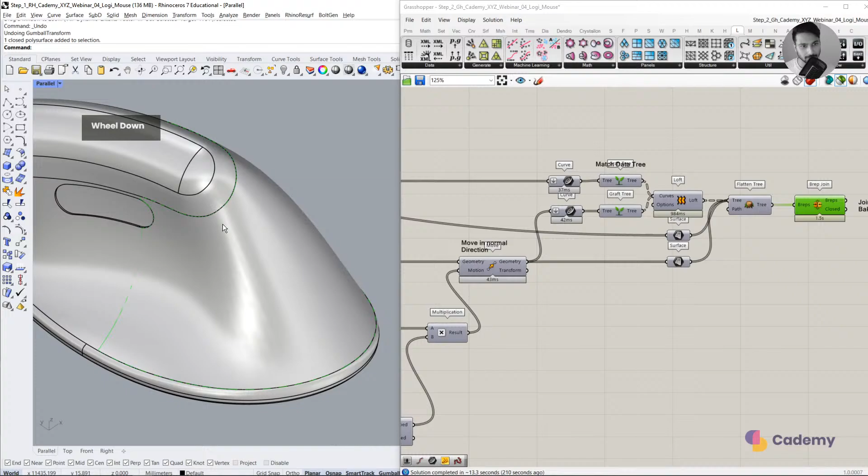Finally, you would move the texture 150 units. What I have done is duplicate the edge of this surface, join it, and move it back 150 units. So you are basically putting the curve exactly where we took it out, and you can split the poly surface with that curve, so you can get rid of this part and substitute it with the texture.

And hopefully when you join it, it should create a single solid poly surface.

Anand is asking, is there a way to blend the pattern to fade away smoothly into the main surface? Actually, the attractor you see here is doing that part. It's just not so obvious in the shaded or wireframe viewport, but if you go to the rendered viewport, you can see the corners are getting faded away.

Okay. And you can check, once I have joined it together, we should get a single solid poly surface, right? So we have taken a patch of the original surface, removed it, applied texture, cut out that part.

And replace it with the texture. Okay, so that's basically the final part. Lastly, you can also split the texture using a plane, depending upon the curve or reference image, to create it into two separate parts using a Boolean split.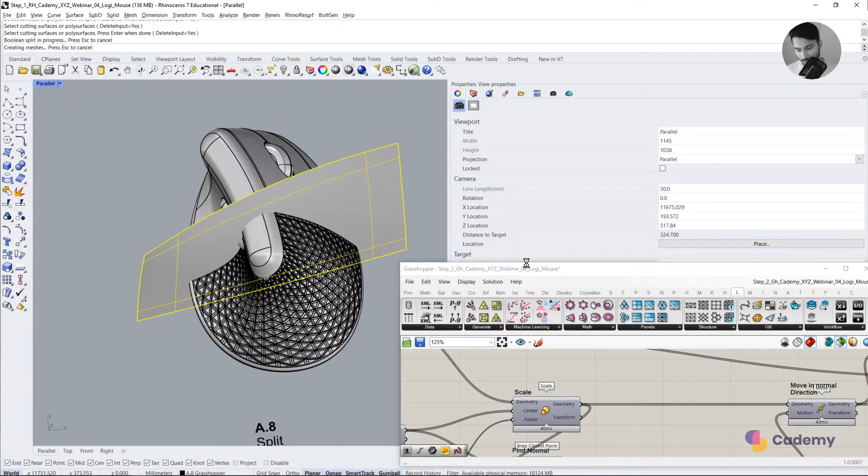Any questions? I think the only issue here was that when we're splitting, it's creating some really small fragments, or maybe some of the fragments are invalid shapes, and that's why we're getting an error here. That's why the next steps weren't working well, but in this case I don't know why it works. Maybe the separated part is moved to another list.

Is it possible to blend patterns to G1 or G2 continuity right in Grasshopper? In Grasshopper, it's going to be a bit difficult to blend in such a way.

Anyways, let's move on to the last part about Keyshot. Okay, you can save the files. You can also export the objects separately, so you can export this one in a layer, this one in another layer, and the buttons in another layer.

Do you have any detailed course on how to build logics in Grasshopper? Yeah, we will be talking about that towards the end. Just a moment.

All right, so you will see that I have a third file. If you open it, you will see that I have basically separated the geometry into a new file. So you can see I have a layer for the texture, for the base, top part, and the button and wheels.

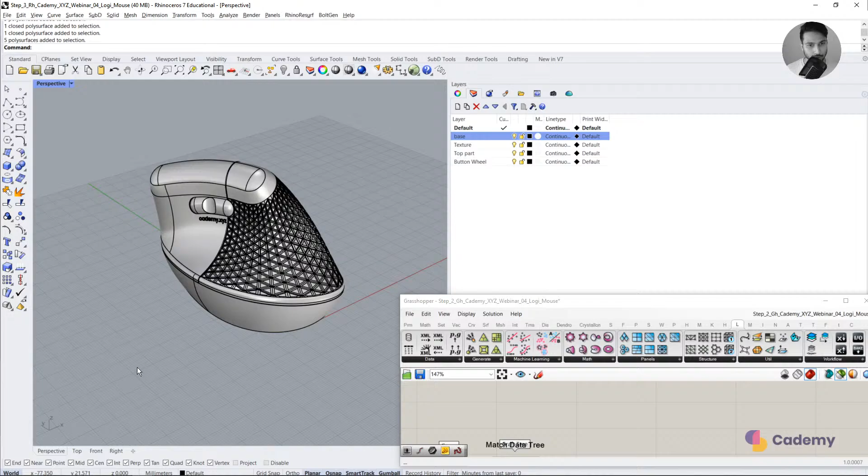Okay, and basically we will be opening this in Keyshot. So let's open Keyshot, and we are going to open the file in Keyshot. Okay, the third file.

Just make sure that when you import the NURBS data, you can control the mesh tessellation later on. No worries, you can also try to follow along through Keyshot 7. Just import the Rhino file.

So in this example, we will be creating a physical light studio. The first thing we need to do is apply a basic plastic material to all of these different objects. I've already applied it, so you can either rename it or apply a new plastic material that is white in color to all of these different parts.

So this is the base, texture, top, and button and the wheels. You can also double click to edit. Let's say this is the texture, this is the top part, this is the button, and this is the base. So it's easy for us to later on differentiate.

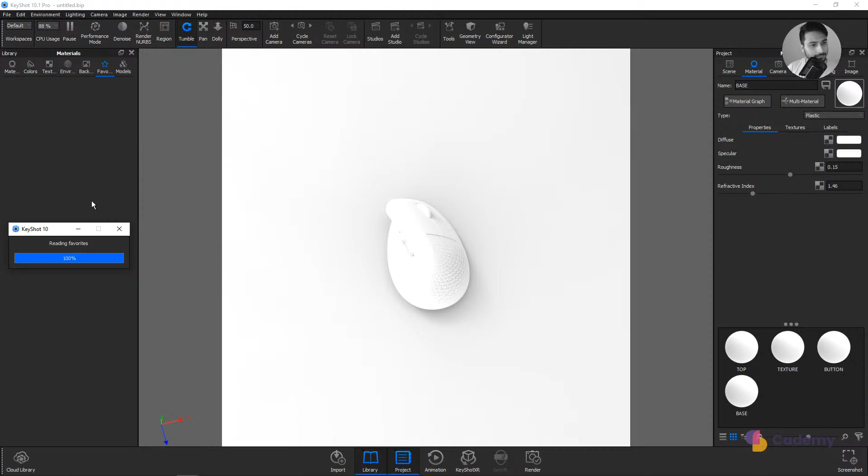So in order to render the mouse, let's first create a floor. Let's go to model, and let's add a simple plane. I'm gonna change the size of the plane, so you can go to position 100... maybe 1000. Okay, 1000 is better.

Okay, and we're gonna create a render from the top view. Let's go to camera. You can define it manually, or just use a standard top view. That's the easiest. I will also change the lens perspectiveness to 200, so that we don't have that much distortion. That's basically the camera setup. Whenever you click here, you will see that camera.

Finally, let's change the base color to white, and let's then add a plane that we will convert into a light source.

Okay, first you need to turn off your environment light so you can see here. Go to the Environment tab, and reduce the brightness to 0.

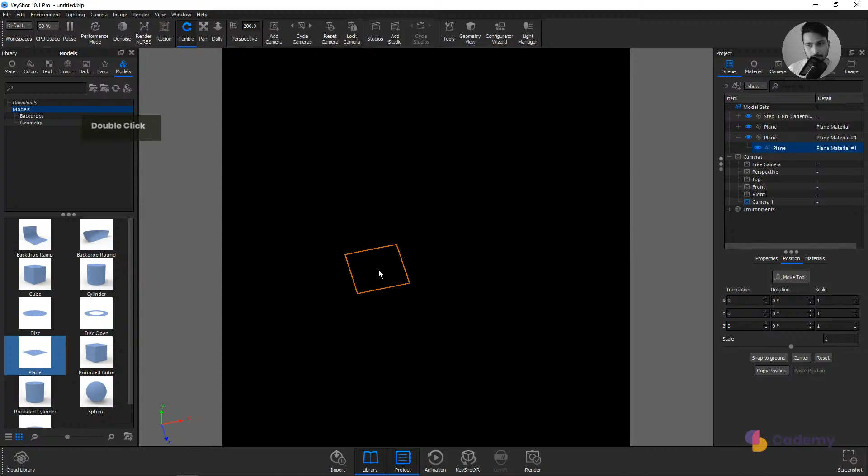Then you take the plane and convert it into an area light. You change the material type of the plane to an area light, and now you just have to orient it properly and calibrate the intensity. Let me rotate it 90 degrees and move it around here.

Once you have positioned the plane, there are a couple of things we can do. First thing we need to change is the power. Generally you should work with lumens, which is luminous flux, and for a 100-watt light bulb it's around 1600. If you work with lux, the size of the panel or plane will determine the intensity. With lumen it's a constant intensity, so that's easier to configure. You can control the shadow smoothness by changing the scale of the panel - the bigger panel, the softer shadow, and the smaller panel, sharper shadows.

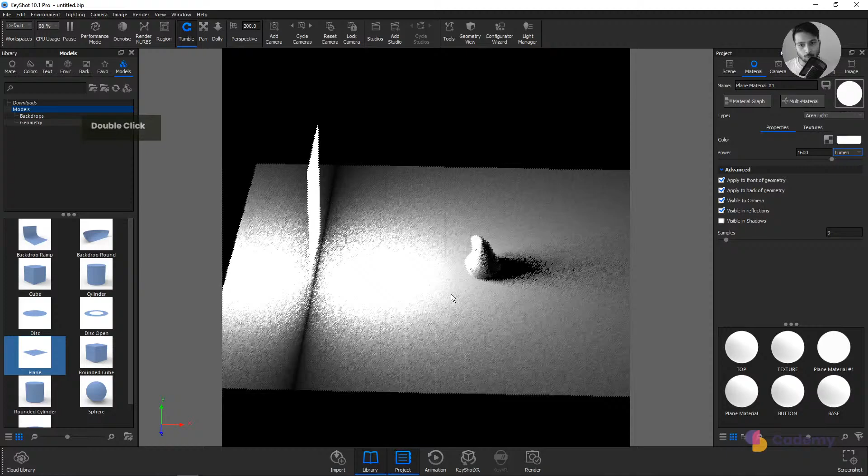Lastly, if you want to rotate the light around the object, around the mouse, you can turn on the move tool, go to position, advanced, select the pivot object to be the mouse, and you can see now the gumball is stuck to the mouse. So now I can rotate it, keeping the mouse in the center. You can go to your camera top view, and here you can calibrate properly which angle you should put your light source from.

Any question till this part? You can of course open the fourth file, which I have already configured, so you don't need to do it from scratch.

If you want to create another plane, you don't have to redo all the steps. You can just right click and duplicate the part, and you get a new plane. Again, set the pivot to this object, and you can then rotate it separately. In this case you will reduce the intensity of the light source so it's not the same intensity, giving you a bit of contrastic effect. Basically you can rotate it and it's gonna create this nice composition.

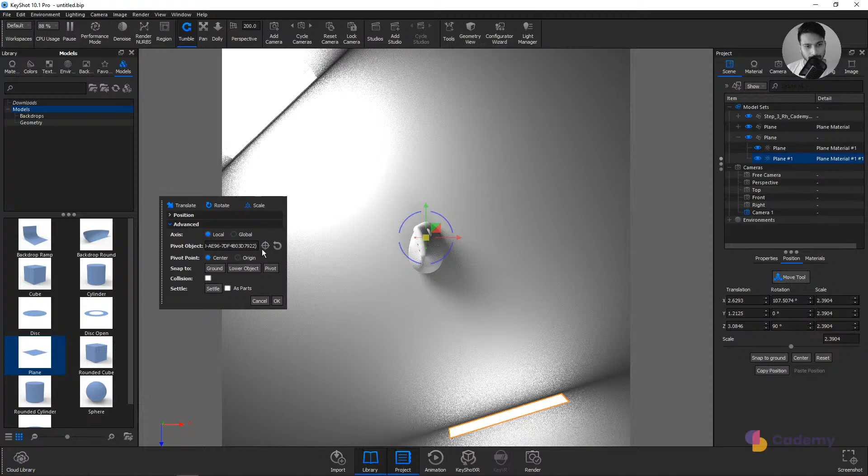Locking the light to the object: you turn on the move tool, go to the advanced tab. Pivot object is not the plane itself, but you click on this button, select the mouse, press OK, and then you can lock it to the mouse.

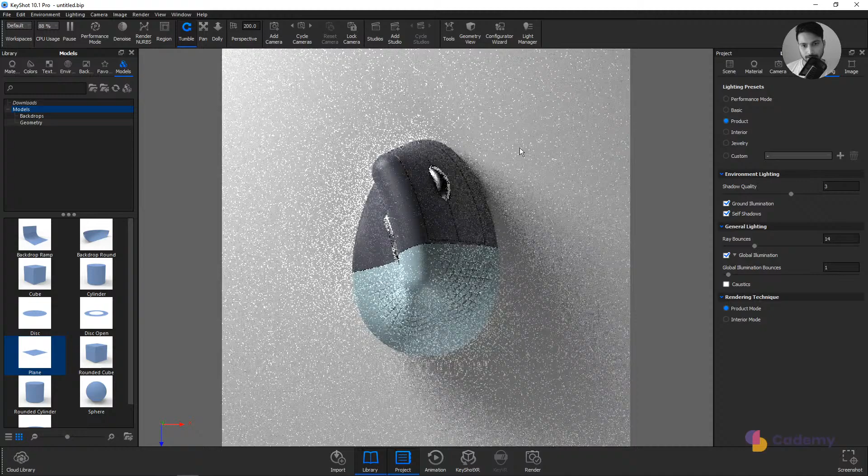In order to render the scene, you need to first find what should be the quality of the render. First, change the lighting preset to product to have better lighting effect. It's going to take a bit longer, but the effect will be a lot better.

You go to render settings, and here you have to define a couple of things. First, where you would like to save the file, what's the name of the file, and on the options tab, here you can calibrate the quality of the render. There is this number called samples, which goes all the way from 1 to hundreds of thousands. You can set it up. But what is basically this sample parameter?

Well, if you go to your viewport and go to view, turn on the heads-up display or press H, you will see that this window pops up. Whenever you reset your viewport, you will see that the sample parameter starts from 1 and then keeps increasing. As it increases, you get better and better render quality.

Basically what you would like to do is render a small region. Let's say this part which has a bit more shadowy area, so you have indirect lighting on that part, and you will wait till you get a really smooth render on this part. Around 40 samples it's looking okayish. We have some noise on the floor, but maybe by 50 or 60 samples it's more than enough for this render. So that is the number you have to plug into this option.

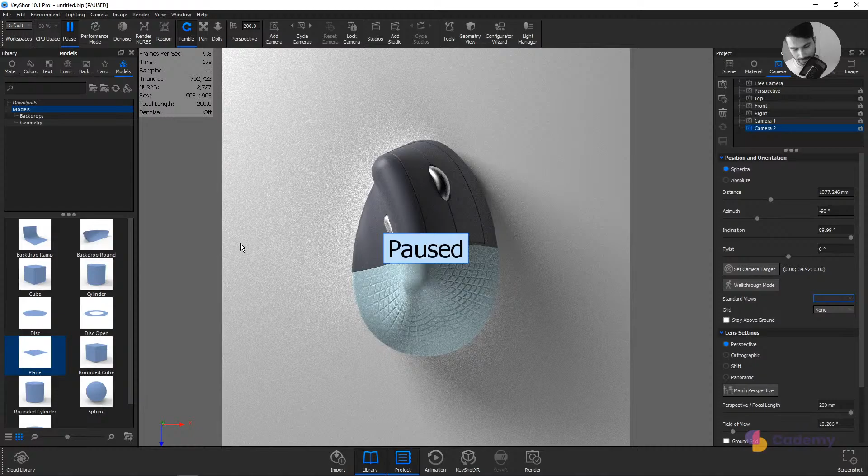What was the option to lock the object? Can you add multiple shaders, bump, etc.? In this case, we are not adding any material effect. Basically, it's just a default plastic material. But yeah, technically you can get into individual materials, and then you can add whatever you want on top of it.

Okay, so let's say you want to add some kind of bump on the front part, so you get some kind of bump texture, let's say noise, and you can add that as a bump. I'm gonna exaggerate so that you can see.

Will the sample continue to increase? Yes, the sample will go on and go on. But the problem is with some increment in sample you get high improvement in quality, but there will come a point where for each sample you are not even noticing the betterment. So it doesn't make sense to wait for, let's say, twice the amount of time and just get maybe 0.1% better render. You have to calibrate it to a certain point where you get a pretty good result. It doesn't make sense to render it twice the length of that render time.

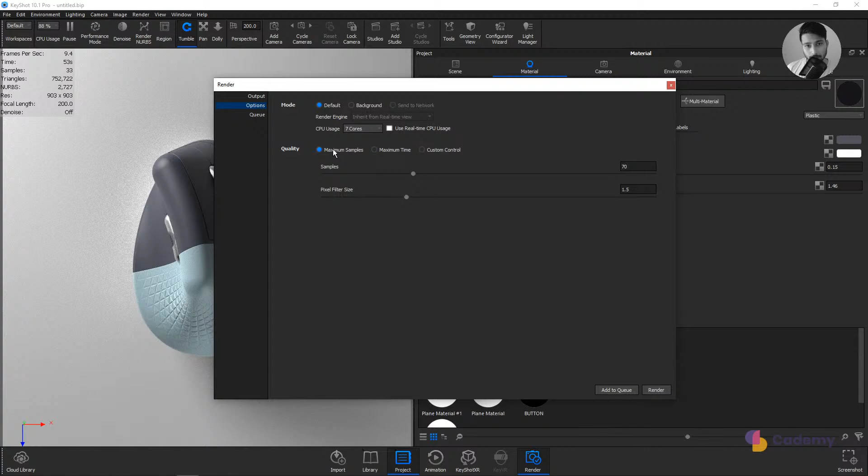Yeah, so 1.5 is what you see in the real-time viewport, but you can change that. You have the same setting on the anti-aliasing quality here, and you can change that as well. But generally you will only render with the maximum sample option.

And if you want to experiment with other file, you can also open that. Here you can see we have created a different composition. So rather than using physical lights, we are using HDRI, and you can test different HDRIs for the textures.

All right, any last questions? I cannot open the file on Keyshot 7. Yeah, unfortunately it's 10 and above.

The option rounded edge works well. It is working well. The only issue is that this is a really complex shape and you might crash your Keyshot window, so be careful when you apply the rounded edge.

All right, let me just talk you through a few things some of you have been asking. One thing a lot of you asked later on is how do I print my designs? So I have an Elegoo 3D printer, Elegoo Mars Pro. It's an SLA 3D printer, and I use ChiTuBox slicer.

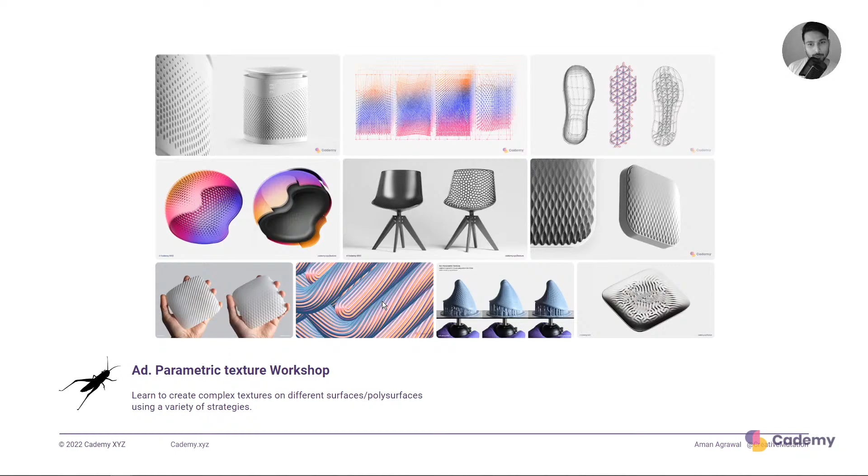Just keep in mind you need prior Grasshopper knowledge to join this workshop. So you have seen the triangle one in this workshop, but the hexagonal texture, which is made with a combination of multiple techniques plus kangaroo, as well as this original texture, that forms part of the Advanced Texture Workshop.

And finally, you have the Keyshot Workshop, where you will learn from scratch how to create materials, configure properly physical lights, HDRI lights, animation, caustics, real cloth, these different nodes, utility nodes, which is basically like Grasshopper. You connect multiple texture properties to generate really interesting renders.

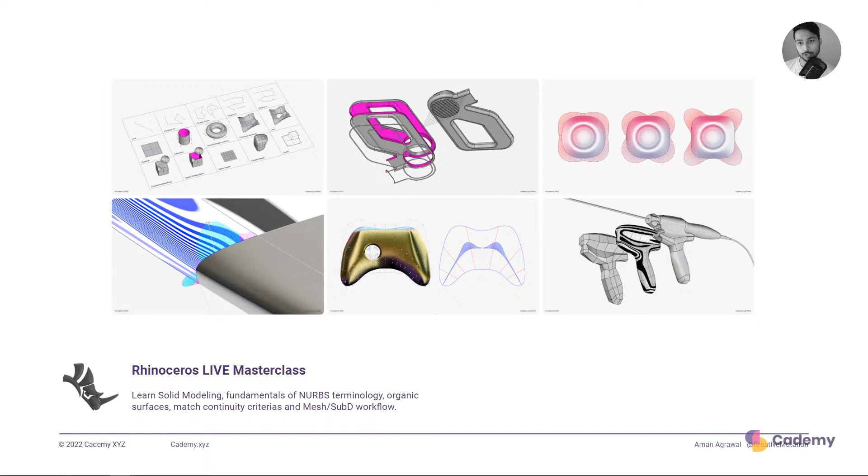Keep in mind all of these workshops that I'm talking about, it's a live workshop, so I'm gonna be teaching these concepts in real time, so you can ask a question. Of course, in YouTube it's a bit difficult, but it's gonna be on Zoom, so you will be able to interact a lot better during the class.

And you can check what our students are up to, so you can go to the portfolio page and you can see some of the samples. So these are basically the project files the students have to submit after they do the course to receive the certificates. So you can check out the different works from the students.

And you can check our free learning resource page. So as I told you, we have past webinars. So this was, let's see, this was the first webinar, which was a bit simpler one, where we created this CD player kind of thing using simple texture. So if you're starting with Rhino and Grasshopper, you can probably start with this.

Then we created this trimmer. You can also download the free files from these respective web pages. And finally, the VR headset. Okay, you can download the files as well.

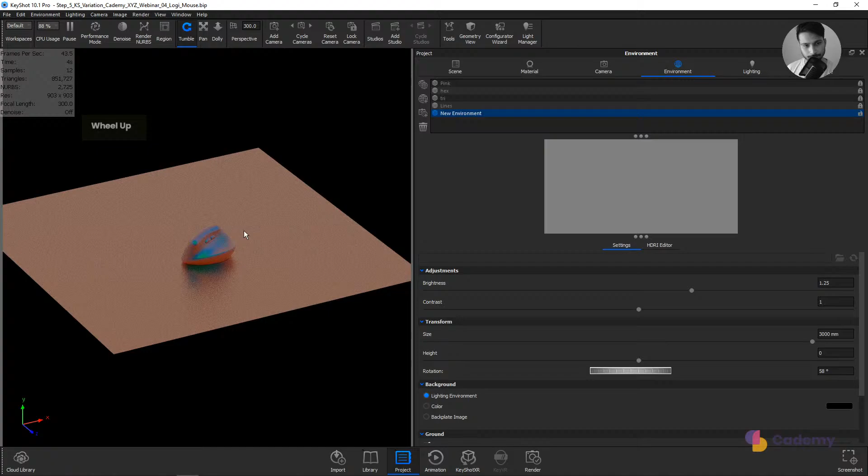Someone asked quickly about the Keyshot HDRI. Basically, you can light up your scene either by physical lights or HDRI lights. So here you can see, let me just turn off the depth of field. You create an empty environment which surrounds the viewport like that. But you can also change the background color to something else, and you can add a light source and move it wherever you want.

If you're interested in this, you can sign up for our Keyshot Workshop, but we also have some simpler instructions on how to configure this on past webinars, so you can check that as well.

What about the course, if I take it, what level of Rhino can I reach? In the Rhino workshop, Rhino masterclass, you will start from really basics, and we will cover a lot of complex things as we progress through the workshop.

You will of course need to do a lot of practice after the workshop, but you will be able to see a wide variety of things you can do in Rhino using different examples. One example is modeling this AirPod Pro case using the Class-A surfacing technique. You will generate simpler single span surfaces, and then match the surfaces with G2 or G3 continuity criteria. You'll see advanced stuff like that, as well as how to use Boolean operations and how to draw curves properly on the first day. So you will see a wide variety of simpler to complex examples that give you a good idea of what you can do with Rhino.